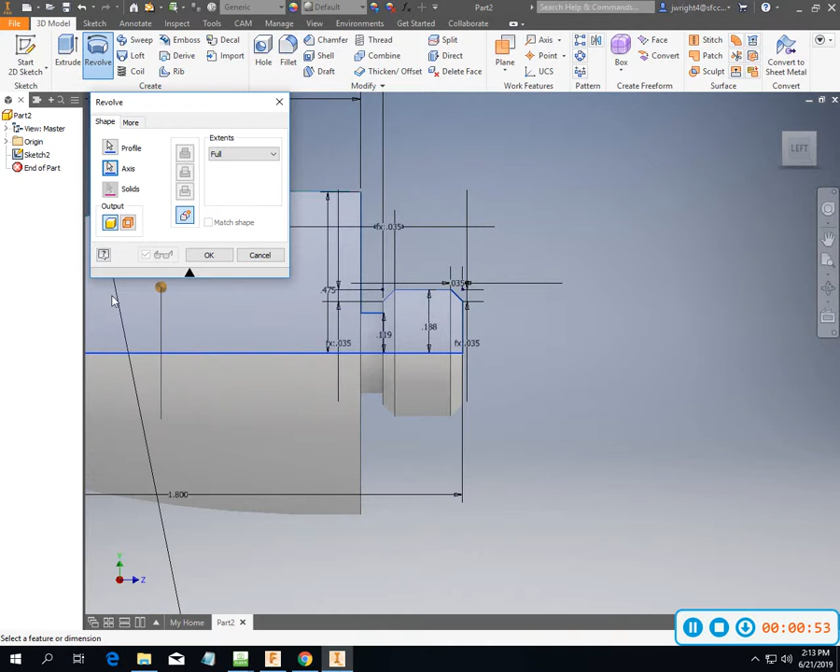So I've got my drawing or my sketch finished up, so I'm just going to save it, and then I'm going to do a revolve from the axis right here, and that looks pretty good. That looks like a nose cone to me. Looks like it's covering the right dimensions, got all the things that I need, and hit OK.

So essentially, I had to go back. I had to get back in there and edit that thing because I did not put a radius down here on the end. So I need to go back here and fill it in. 25 thousandths, I believe. Here and here. Yep. Close that. Go back. Finish that sketch. There we go. Now I got my radius on there.

Oh shoot, I missed a chamfer up here too. My gosh, I'm as bad as a student. Go back in and edit that thing. I'm trying to knock out several videos today, so it's kind of going back and forth on some stuff. So I'm going between quality and this class.

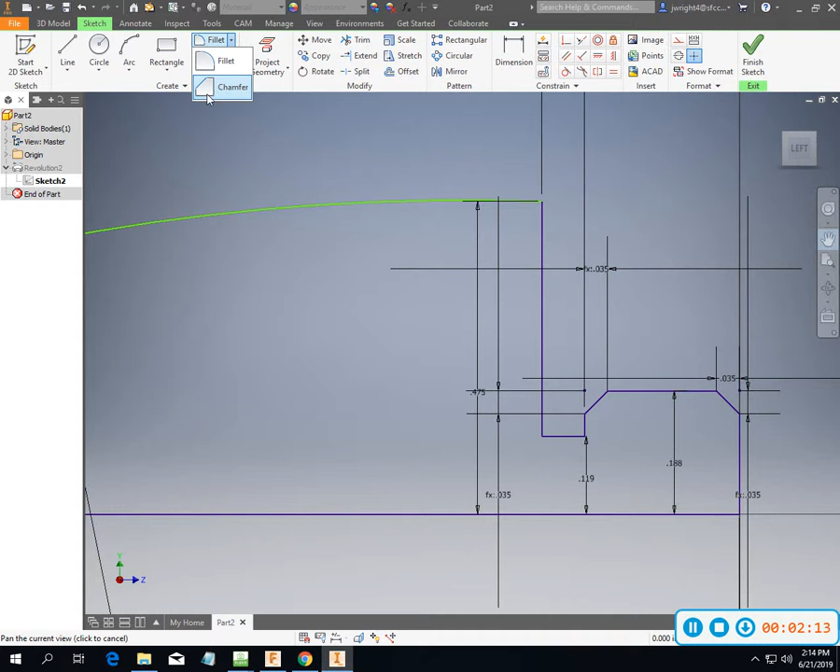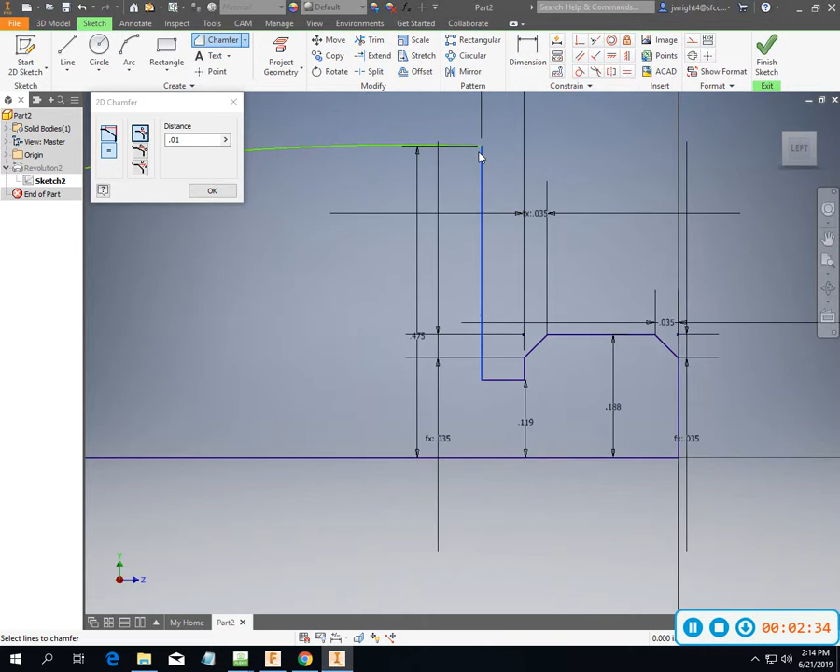So let's put a chamfer in, and it is a 10 thousandths. Oh, barely worth even putting in there. You connect to that. Looks like I got something going on here. Let me pan around. I don't know that it matters terribly on this part, but here's my 475. That should be the 950 for the OD, but if you look, I'm going to draw a line right across here.

I actually go up above there in this section here. I'm going to trim that out. Bring that back in. And like I said, I don't think that makes much difference on the part that we're working on. Really, these are kind of just play toys anyways. Put 10 thousandths chamfer in that. I think I have everything that I need now. If not, we'll just say we do. Finish that sketch, bring it back to Revolution, and there it is.

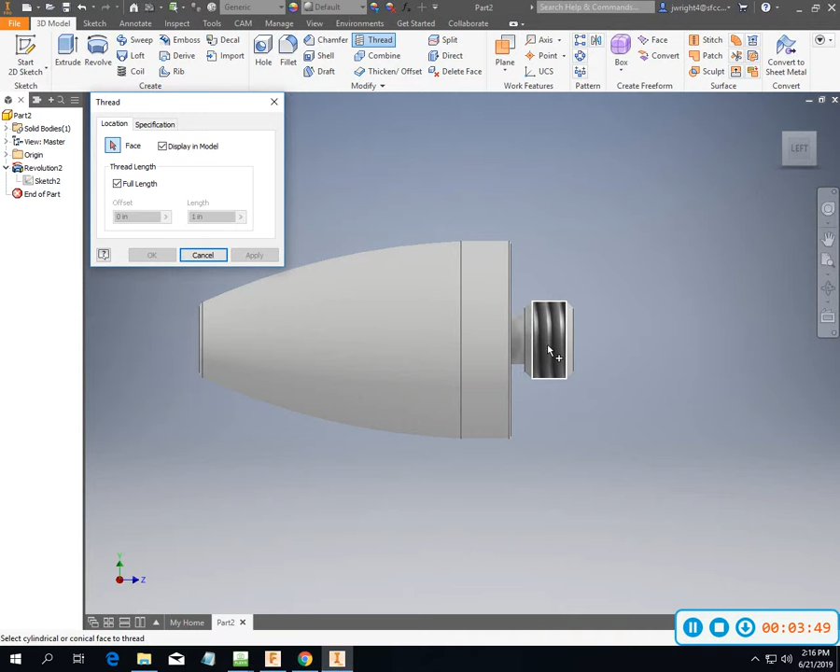Now, I went ahead and put chamfers on the fronts and the backs of my threaded parts. We'll go ahead and thread that. Change that 3/8-16. And it is a 3/8-16. It's on sheet 2 of 2, 3/8-16. There's not very many threads on that part. It is right-handed and it's external, so it's A, and the class of it is 2. Call it good there.

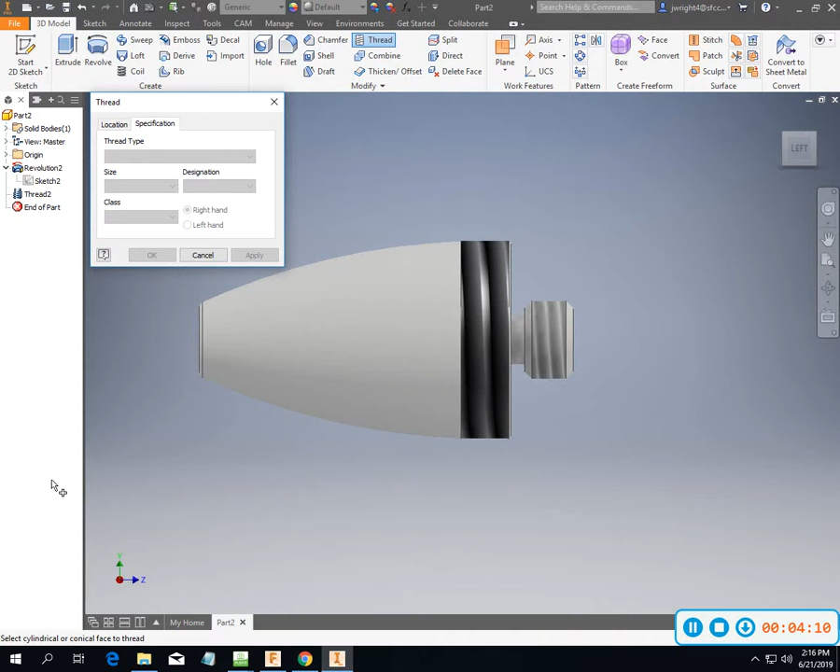So if you are doing threads on Inventor, I've always used an add-in called Cool Orange. You can download it and it'll populate up here in your tabs. On this version, we just updated to 2019, and when they did that, they did not bring in all of my add-ins with it. So right now I don't have it. So that doesn't mean that it's not putting the threads on there. It just means that it does not create real threads as you're viewing them. So what you're really getting is just kind of an overlay of a picture of threads, which is okay.

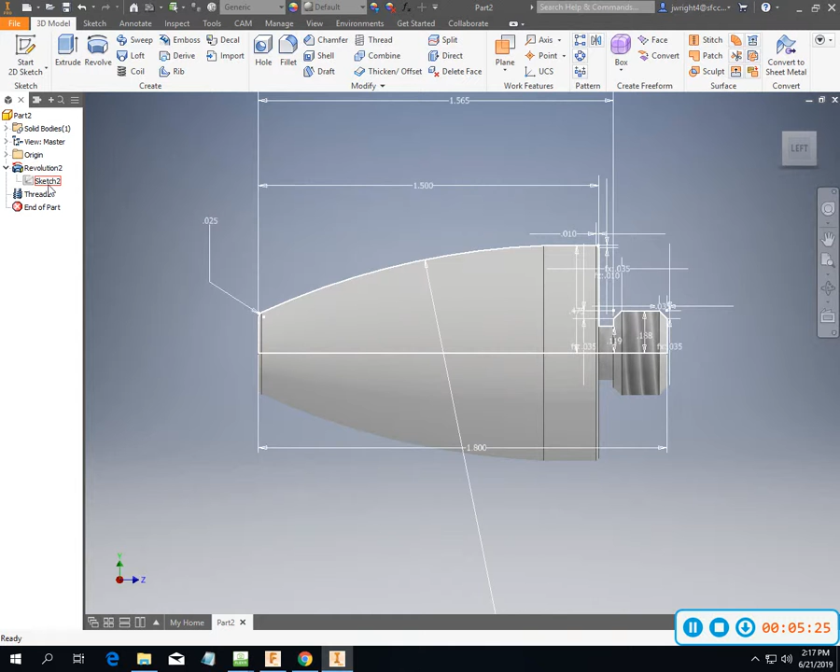I mean, it's not killing us. There's nothing wrong with it. It's still going to thread and do what we want. And even if it didn't, we can go in and make some modifications to what it is that we wanted to do. So here we have our part, and pretty happy with most of the things on it. And it actually looks like, as I'm looking at my sheet 1, there is a dimension of 1.375. I'm going to go back and take a look at that and just see where we ended up on that when we made our modification to our radius there.

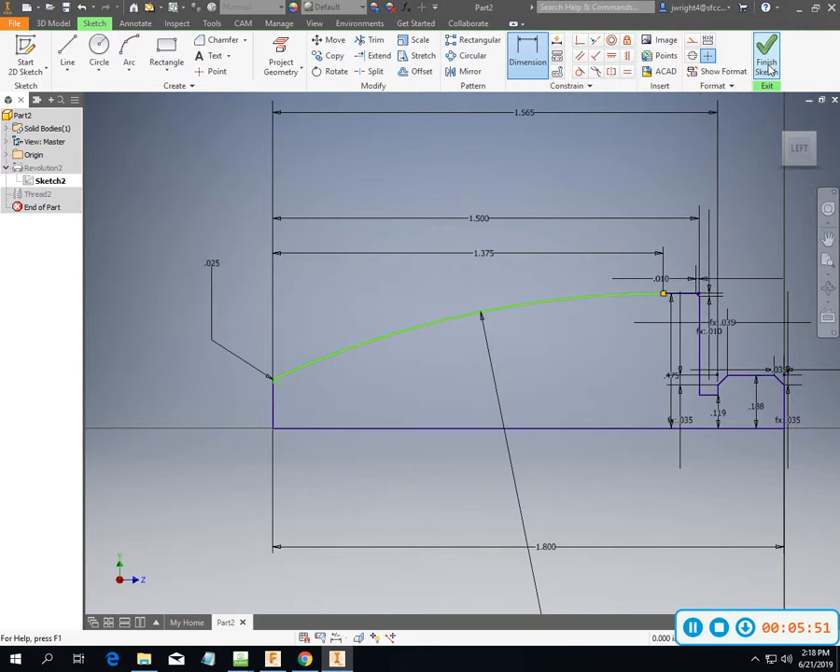So from this point to the end point, a little bit off. Alright, so let's do this. Let's go ahead and make it 1.375. Push that back. And then finish the sketch. Alright, that looks a lot better. Looks more like the print. That's the great thing about HSM and Fusion as well, is that all of these things are global. Everything's moving along with it, so even if I changed my part after I made my program, all these things are going to follow along with it.

So I've got my drawing, and now I can go in and start applying some machining. So I go to the CAM tab, and I'm going to start doing some turning.

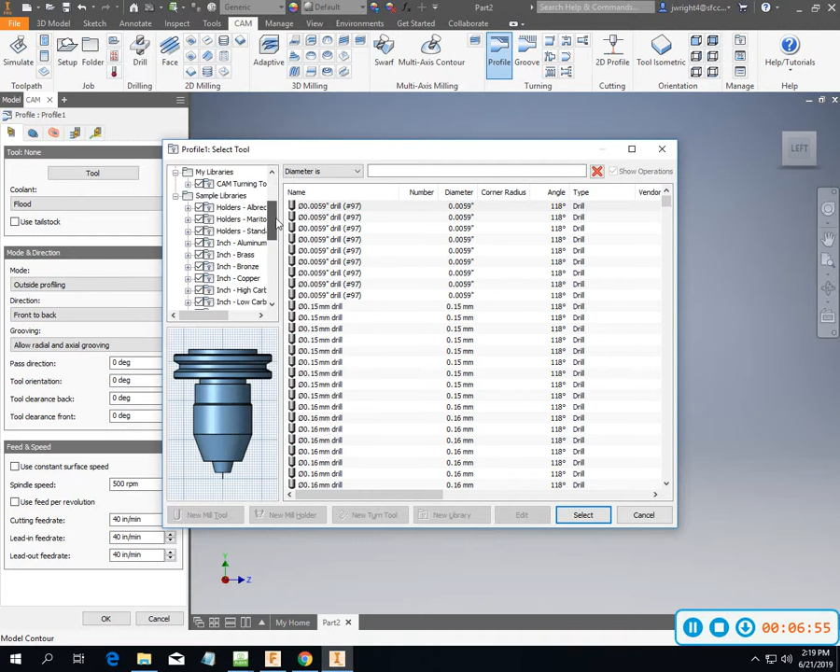So I can come in here and go profile, get a little more room there, and pick the tool that I want. I tried to import that HSM package, and it did not quite come in the way I wanted it to. So what I'm going to do is, I've got kind of a generic set of tools here, so I'm going to just create and modify as I go.

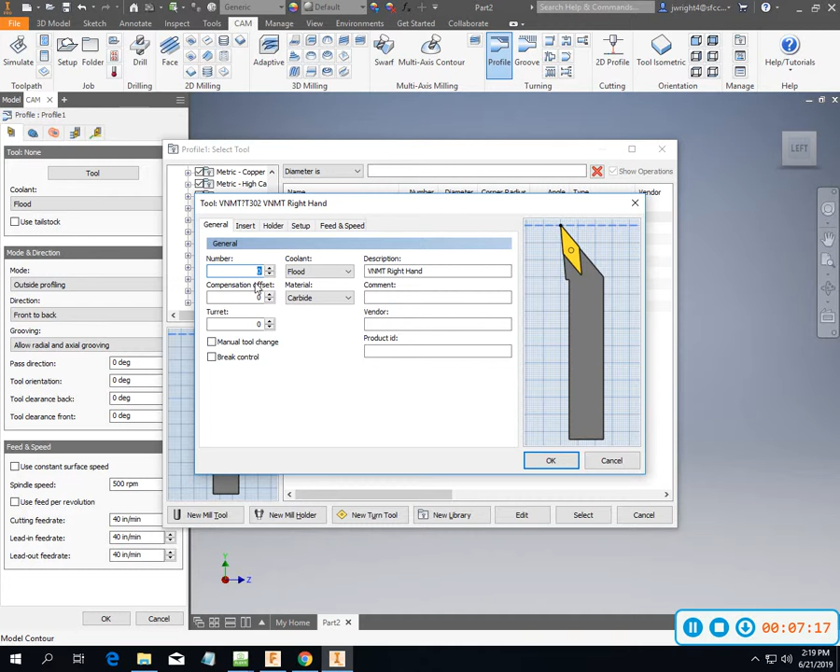So I got a VNMT, which is similar in size and shape, so I can edit it. Carbide, we can call it tool number 1 if we want to today. And non-reversible, ours is actually reversible on our insert. That's a 35 degree. Let's see if it has a 55 degree option in there. There's one. Let's just try to make it as close to being what we really have.

Okay. I'm pretty sure the ones that we have are the same ones that are Kennametal, and they are not reversible. So two-sided, not reversible. And let's see, corner radius is a lot sharper than that, I'd say. I don't have the inserts in front of me, but I would say probably something a little closer to that. Yeah, everything else seems like it'd be okay for right now.

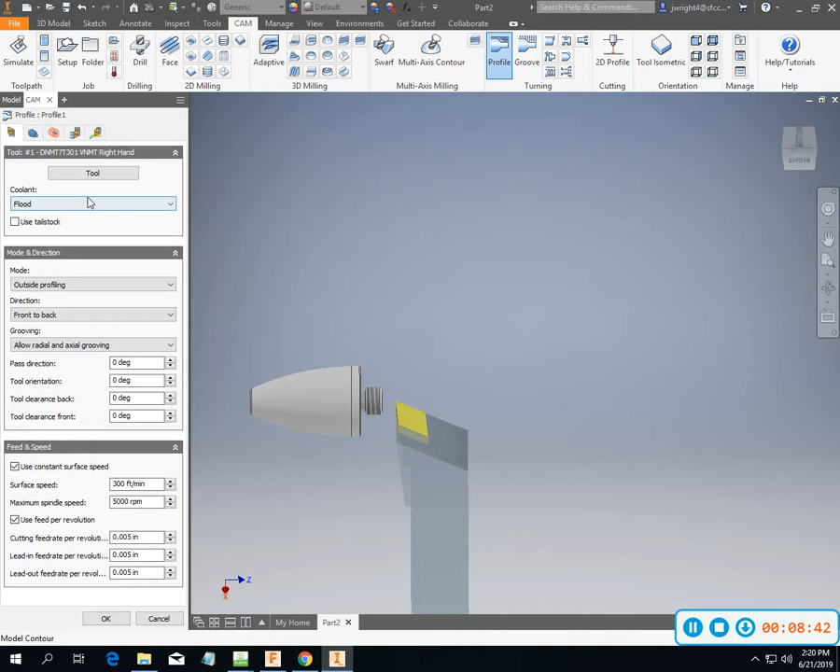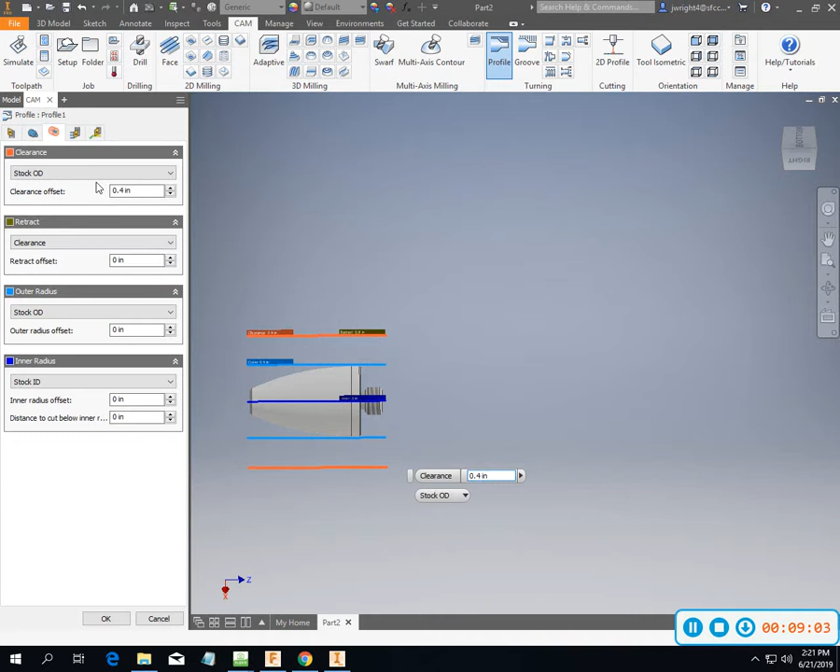Something doesn't look right. Okay. This thing flipped over and around. And we need to look at what our stock size is. So this part, I think it comes from a 2-inch stock. So got our model. Oh, you know what I did? I need to get rid of this first. Come back out of there, go back into my setup. Yeah, I started an operation, but I never actually did my setup one for it. I knew something wasn't right, but I just couldn't tell exactly what was going on there.

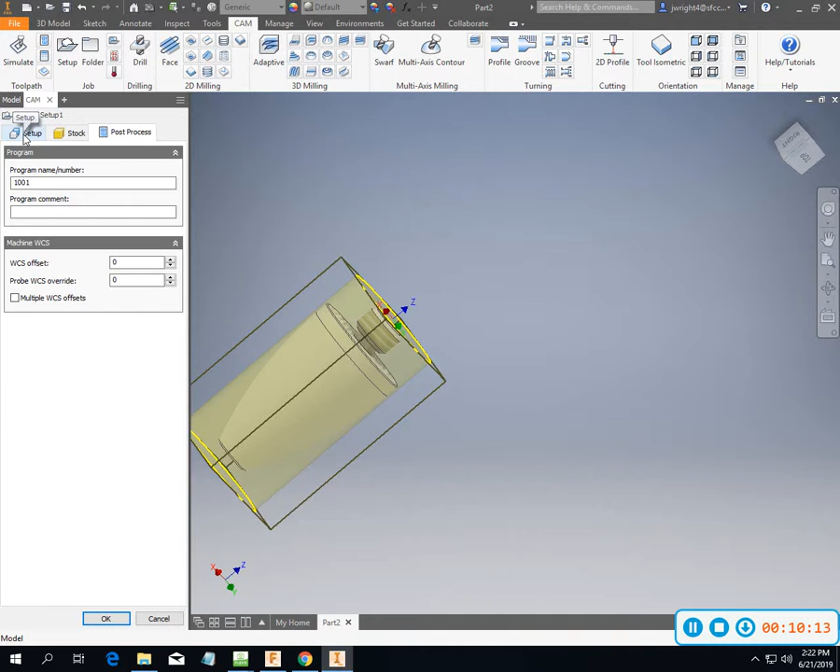So here's my part. Get this thing looking just a little bit more like it ought to. And we're doing a mill turn, so you got milling, turning, mill turn, and alright. Let's go to stock. Our diameter is 1 inch, that can be 2 inches. Go from the front, and let's give it an offset of about 50 thousandths. Post-process, we're not concerned about what offsets we're working with right now. Okay, everything else popped in okay.

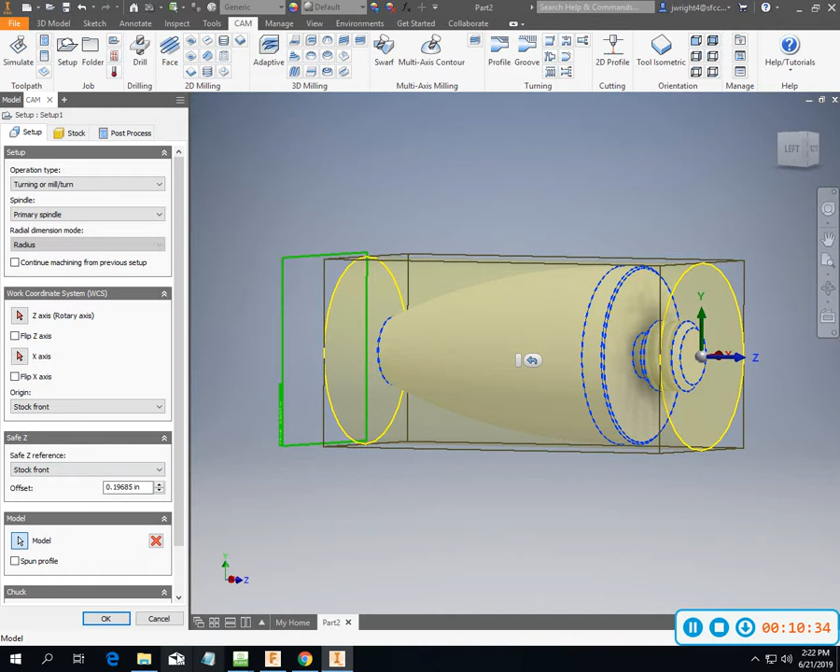I often start my drawings wrong and don't actually get what I want where I want it. And this one didn't turn out too terribly bad. So there's my stock, my round stock, my 1-inch aluminum stock, and let's see, no Z-axis, rotary axis selected. Okay, so let's go to Z-axis. So my Z-axis, no, I want to flip that. Yeah. Okay. So this profile I never did anything with, but I need to do something with it. So it's still there.

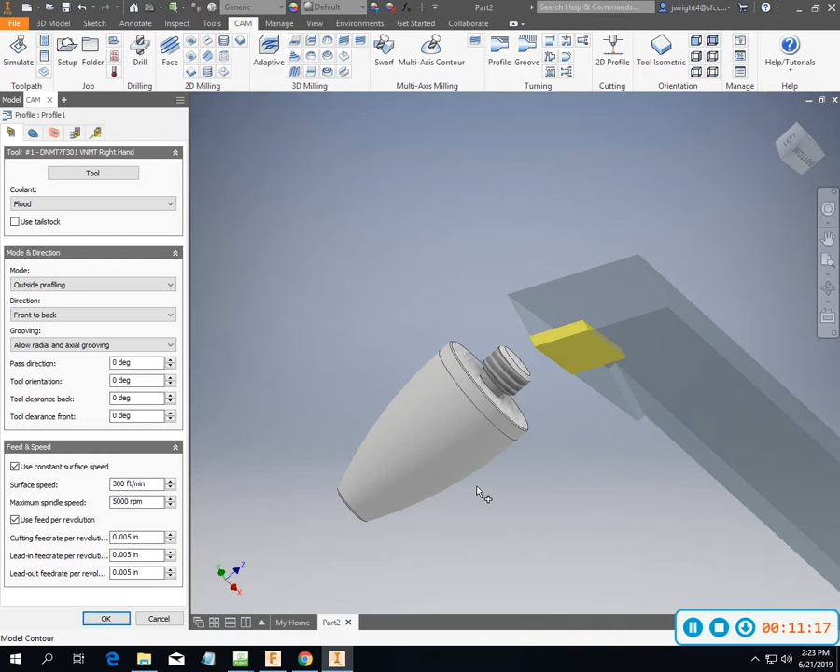And turning on CAM has been something that we've been doing for a long time. I've kind of got this thing flipped around, but it'll be okay. There we go. I feel a little more comfortable about that. Okay. And so I've got some stuff that we talked about last time, how I want to control my tool in computer and control wear, inverse wear. Fusion is not going to give you those options in there. So what do I want to do? Kind of do some lead in action if I want to have a lead in, lead out on there. But at least for now, we can kind of start with stock.

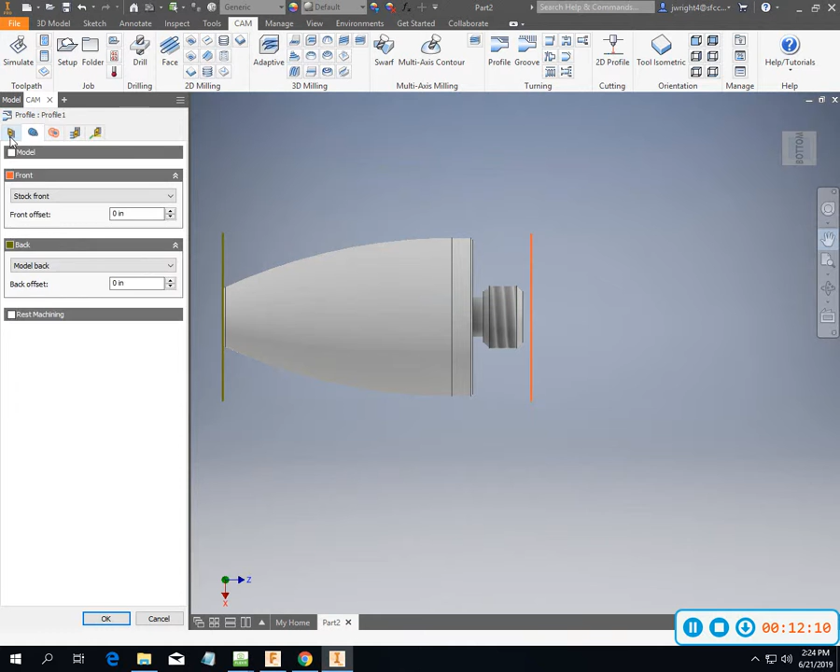All right. So a long time ago, this really would have bothered me about the way that it faces it off or does not face it off. I can go in there and actually force some facing off. So up here I've got turning face, I've got profile and grooving, turning, I've got a couple of turning and parting options, I've got secondary spindle stuff. I can do this as a face-off pass, or I can just go straight into the actual lineal turning for it. So if I simulate that,

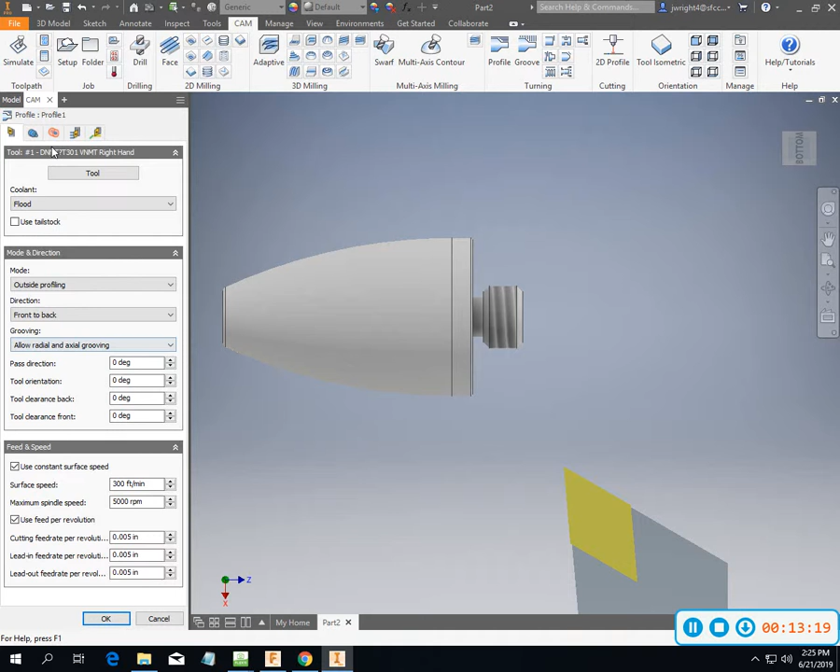so my red is a little bit of collision detection that's coming up. I think for what I've got, it's not going to give me much problem. I do want to come back in and do this though. I do not want to take a finish pass across there. I'm going to go ahead and simulate again after that. Now, by doing that, since my 55 degree didn't have enough clearance to get into some areas like down into this section here to do the chamfer, you could tell it knew at least that it was not going to be able to do that.

So what I'll do now is I can just do another operation, I can do another turning operation, another profile operation, I could come in and face it, I can do really essentially whatever I want to do there. And so I can do a profile, or if I want to, I can duplicate what I've got. It kind of just depends on what you want to do. So I'm gonna call this my rough passes, and I'm gonna call this one my finish passes.

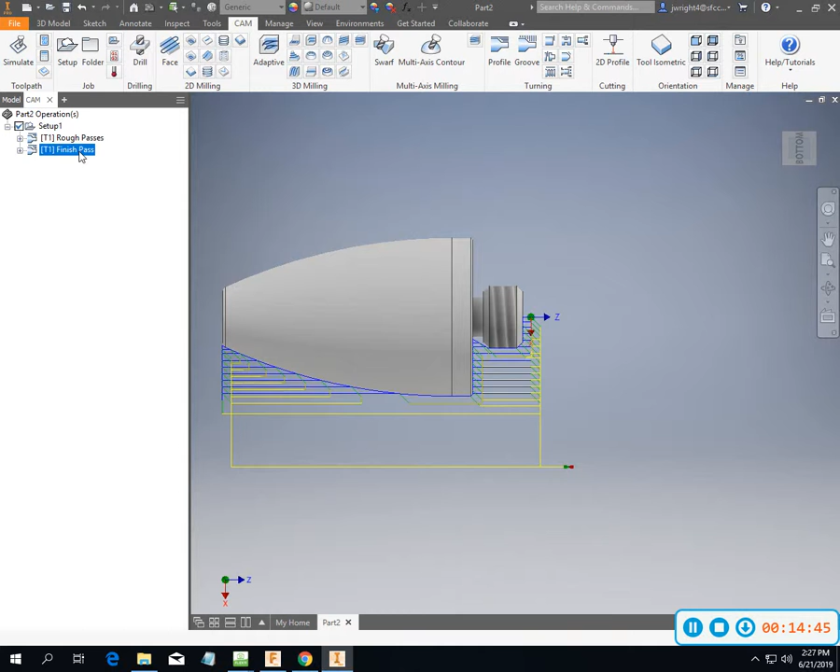Finish pass. Now, I'm not going to use the same tool. I'm just using this as an opportunity to see what you can do with duplicating. So let's call up a new tool, or let's take this tool and duplicate it and open it up, and we're going to call it tool 2 using offset 2.

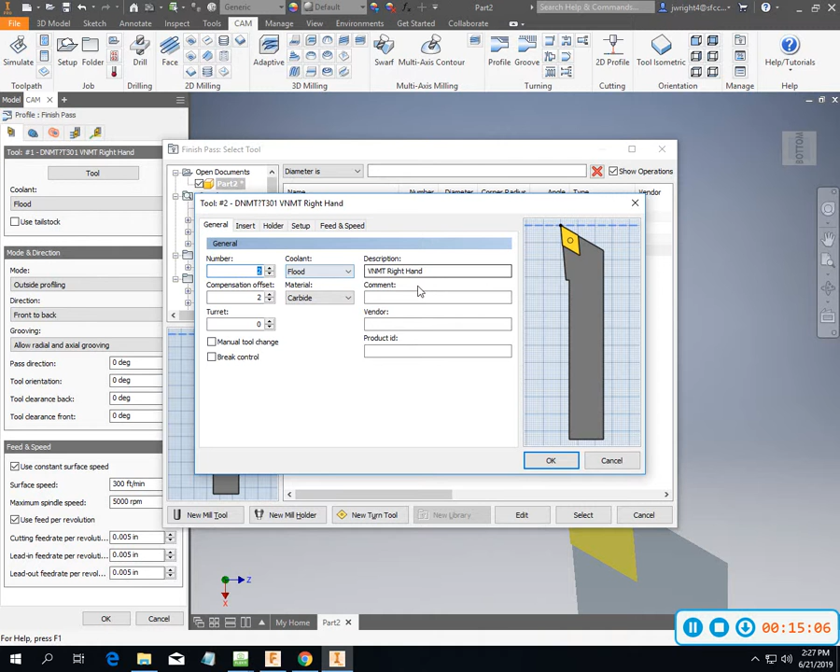It's carbide. We can still call it a VNMT. Doesn't make any difference to me, but we are going to change the angle on it, 35 degrees. So now that's tool 2. Okay. So now we haven't told it any different, so it thinks it's trying to rough it. So now we need to go into our options. We do not want to rough it.

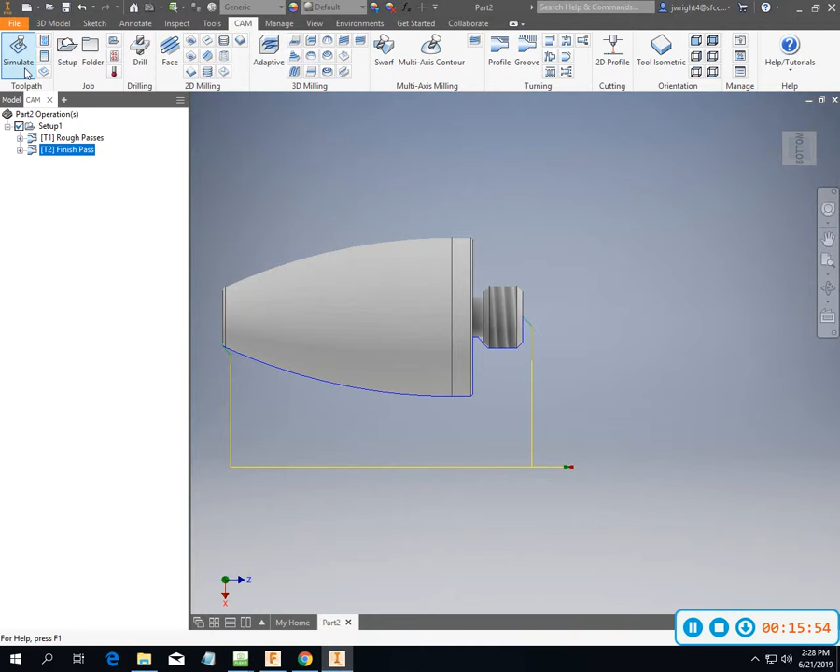Single pass to finish it. Barely has enough clearance, it looks like, to get inside of there. Now it shows collision in the red, but I think that we're going to be okay on that. We could come in there and tweak just a little bit of what's going on with that to get some of those things out of it. I think from what we've got here, just knowing what I know about this tool, we're going to be okay there.

So that stuff's done. Tool 1 is almost always our rougher. Tool 2 is almost always our finisher. This is probably one of our easier ones to do, because as we get into some of the other ones, we're going to get into some pretty wonky little things. So I'm going to have to flip back and forth as we're working on this one, just to try to remember what all we have for our grooving options,

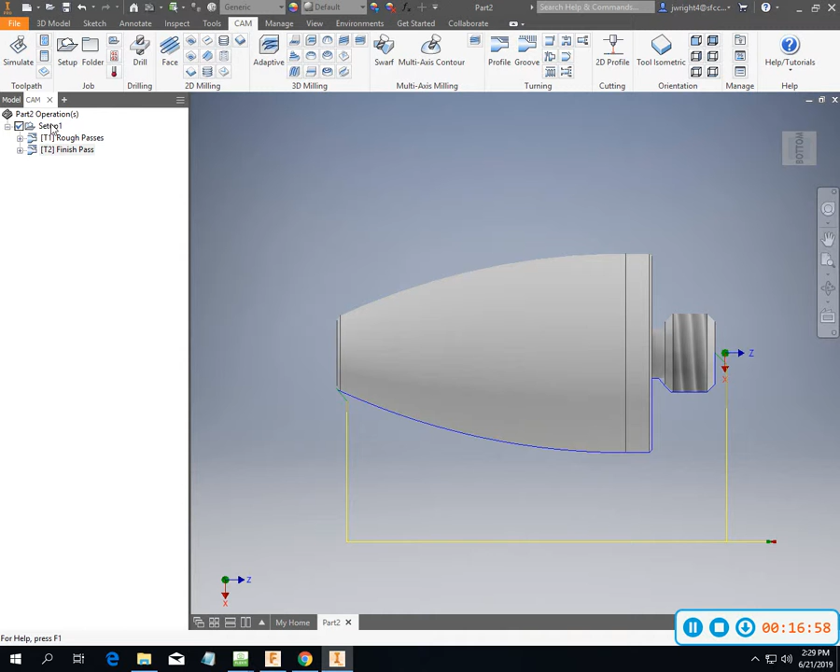and then we have a normal parting tool here. So it looks like this groove right here is 65 thousandths, and so I can go back to my model and edit that sketch. Just jump in there and see. Take a quick dimension on it from here to here. 65 thousandths. Yep. Finish that sketch. Go back to my CAM. Regenerate those if I want to.

Now I have a couple of tools that I have gotten from Kennametal, and one of them is a really narrow tool, and I'm going to pop up my Fusion that I have here, and I think I already have some stuff set up, if I can find it. Go to manufacture, and in my tool library, in my local, this CAM lathe tool is already set up and ready to go to download in your first turning module in EDT 134.

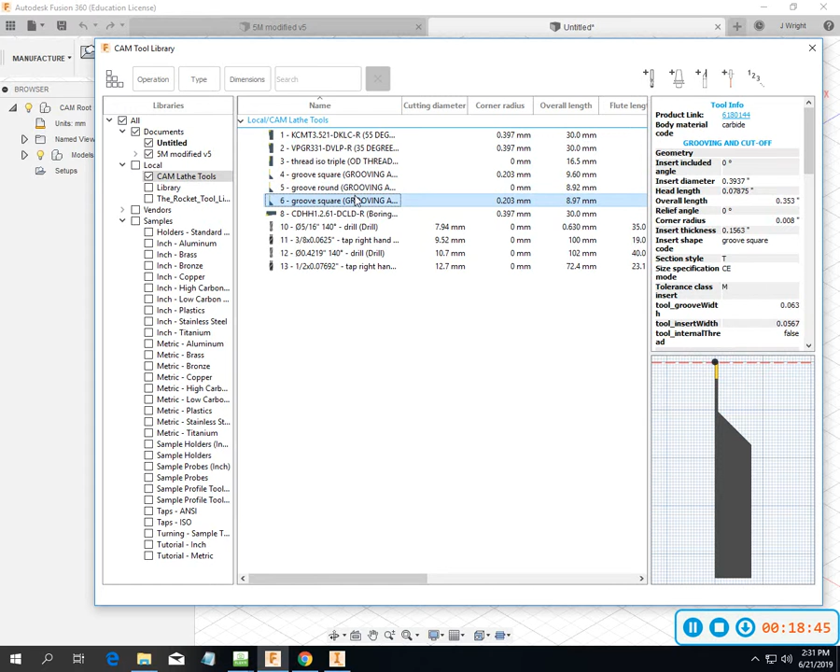So let's see, here is a groove square, and that insert width is 118. That one will not do it. This is 79 thousandths, and this one is 63 thousandths. Alright, is that going to be what I want it to be? Some of these dimensions they gave us off of the CAM package, and I downloaded this from Titan, and then just did some modifying, because we're not using the carbide drill. So we'll just be using high-speed steel 5/16 and 421 drill there.

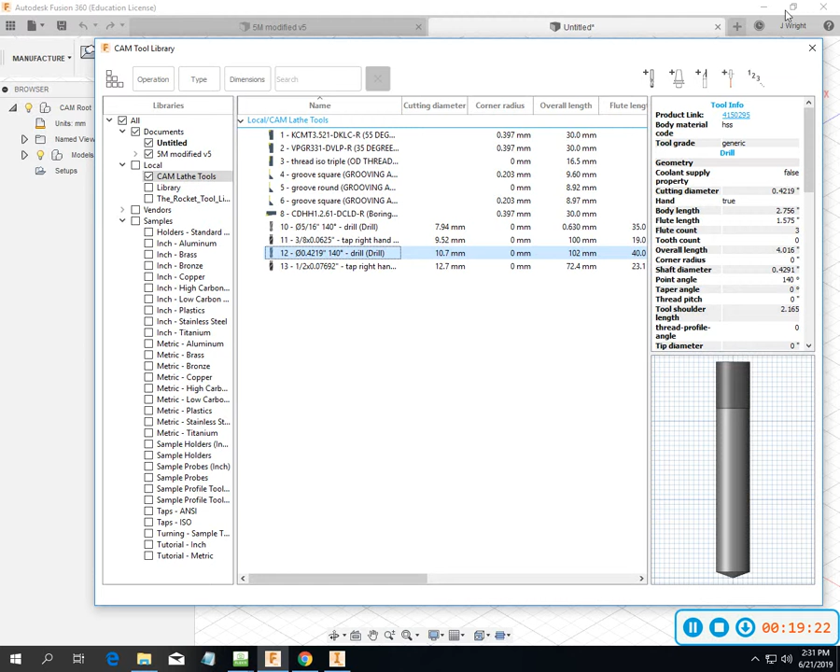So I believe that our tool that we're using is going to be right at about 63 thousandths wide, and I think we got enough tolerance on this part. We can probably come in there with one plunge cut for the 63 thousandths. The downside of that is it does not leave us hardly any room to play with on our threading. So we'll shut that thing down, come in here, and we can do a single groove, and let's see what we've got.

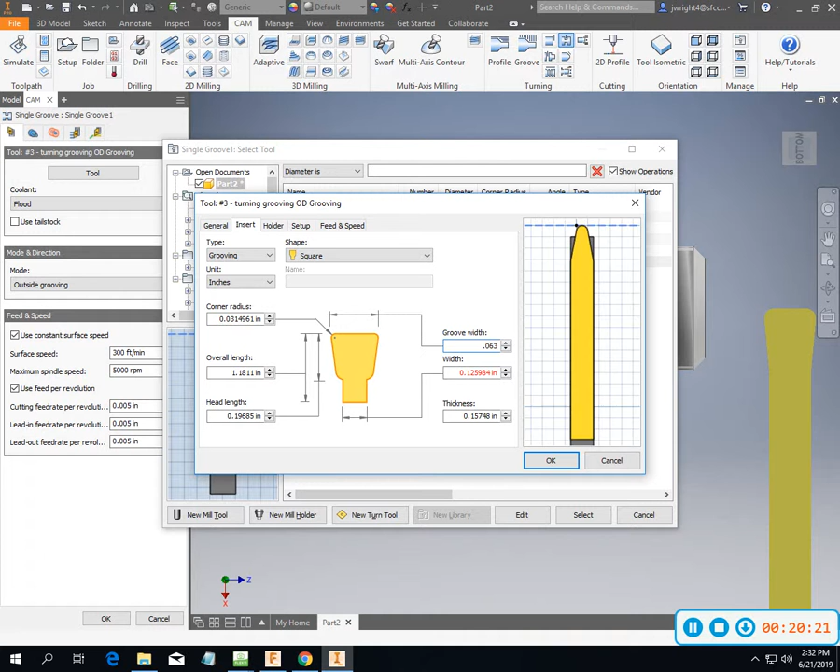Turning samples, turning OD groove. I don't have anything that's even remotely close. So I will select this guy, and I'm going to go back into it and modify it. Square groove, it's going to be tool 3, and our insert in inches is going to be 63 thousandths. Let's just say 63 thousandths all the way through. And it is square. I think we got a little bit of corner radius, but not much. Let's just say we got 5 thousandths in there.

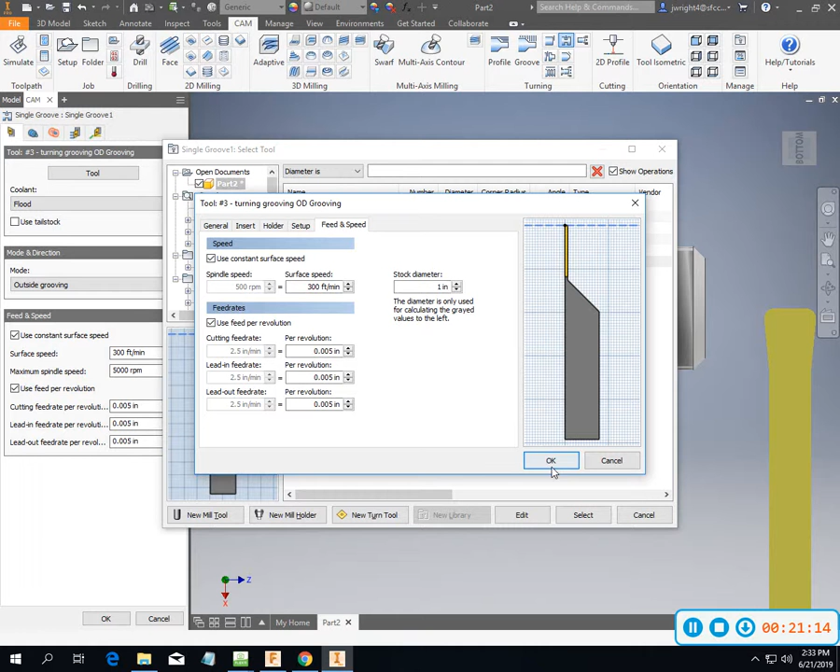So on this one, constant surface speed is used. That'll be G96. It's going to allow your spindle to speed up as it goes down to a smaller diameter. It's going to slow down as it goes to a bigger diameter. If I wanted to keep a consistent RPM, I can come in here and make it a constant RPM. So we can try that on this one and see what it looks like. Normally, I would use that surface footage. We can try both ways and see. So I'll let you guys play around with that one. Okay, and we'll select it. And so our groove.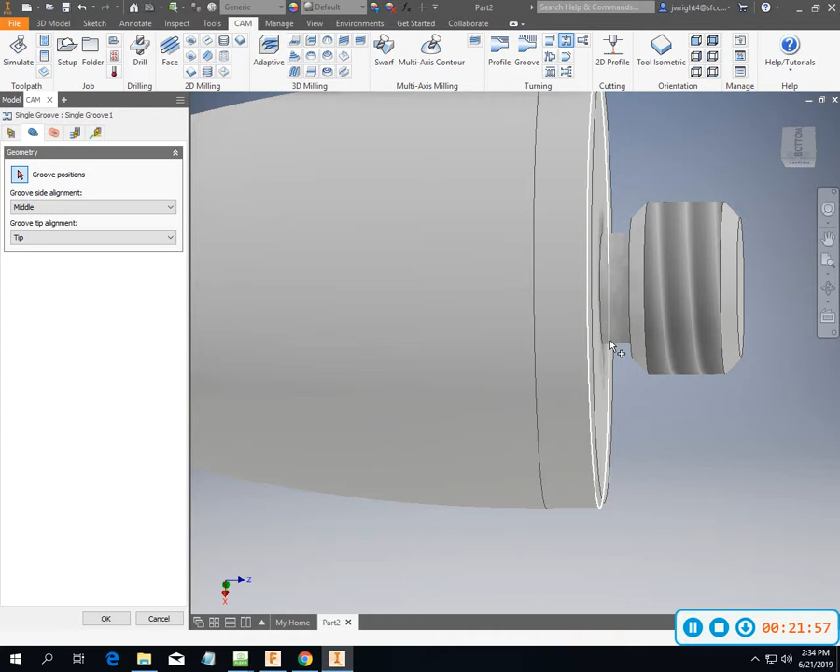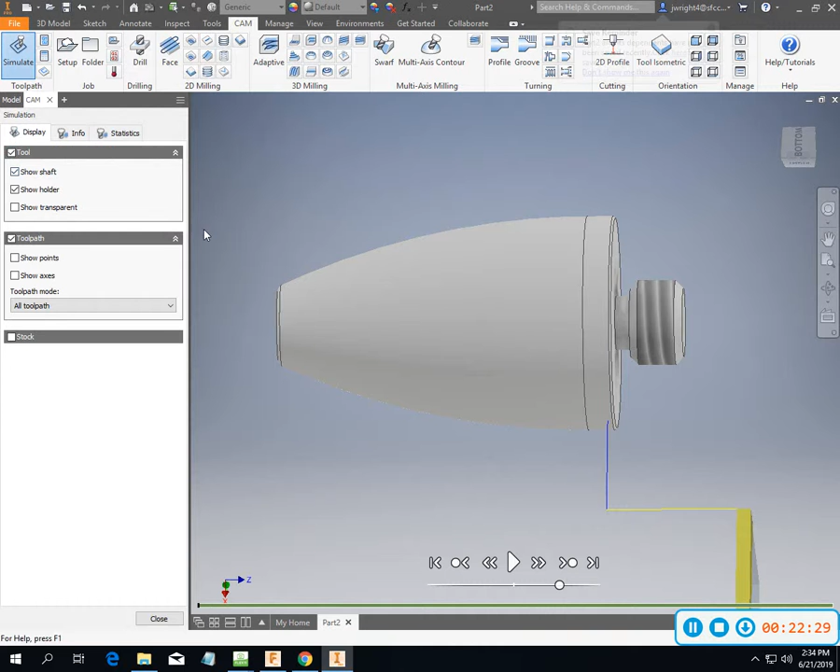Let's see. Come down, let's see what that does. No, see, that cuts into it. So we need to come back into it. Front. Still going into it. What do we got going on here?

There we go. All right, single groove application there.

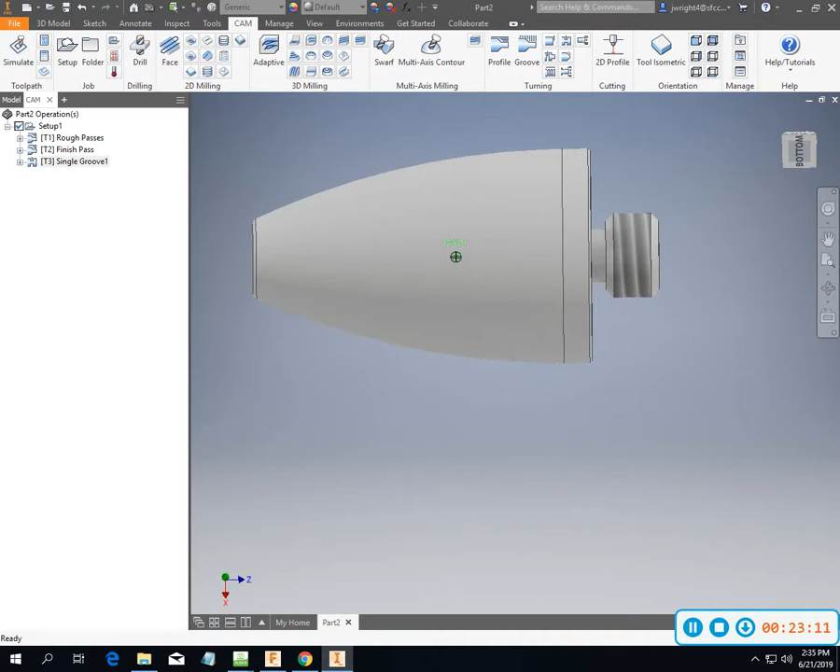I think what we're working on, especially this being our first one, we'll spend more time talking about constant surface footage and cutter speed as we go. This would be a good one, just to get a feel for it, that way this thing's not spinning so fast as everything's happening. We are going to get a lot better surface finish if we go ahead and use the G96 on this.

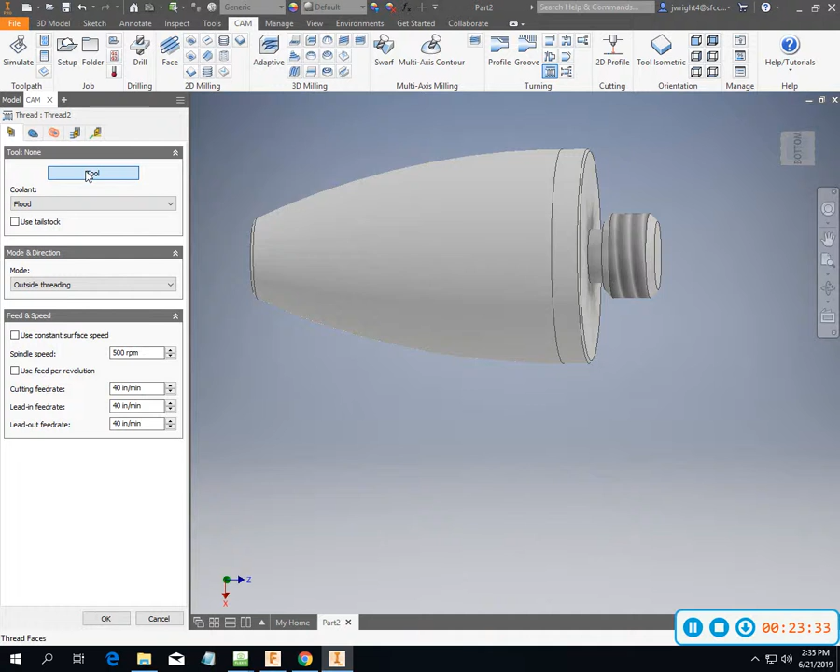All right, so now we need to do some threading. I already have a decent little threading tool set up there.

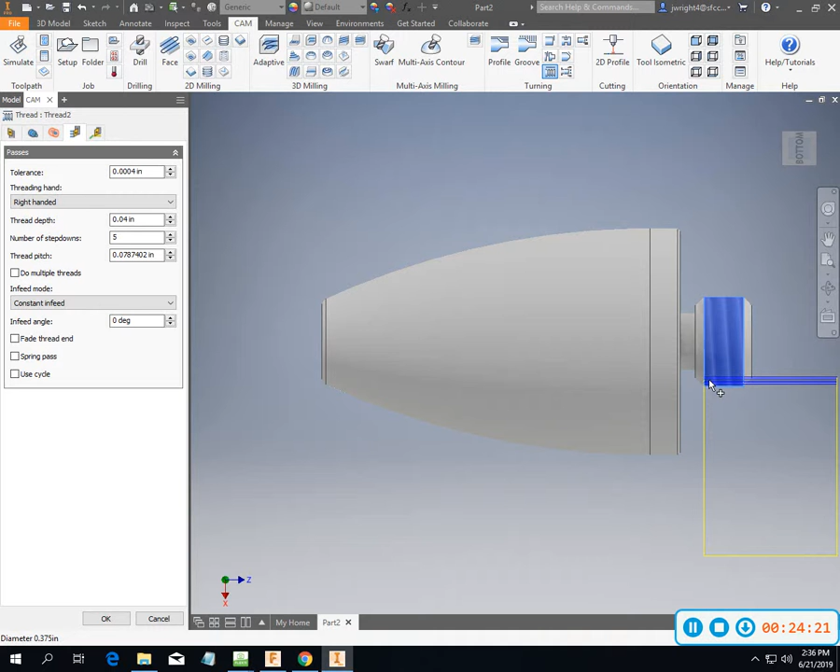What I don't like about this is it's only going to this edge, so we're going to need to be able to move on just a little bit past that particular thread. That's what I don't love about having the chamfer on that back side.

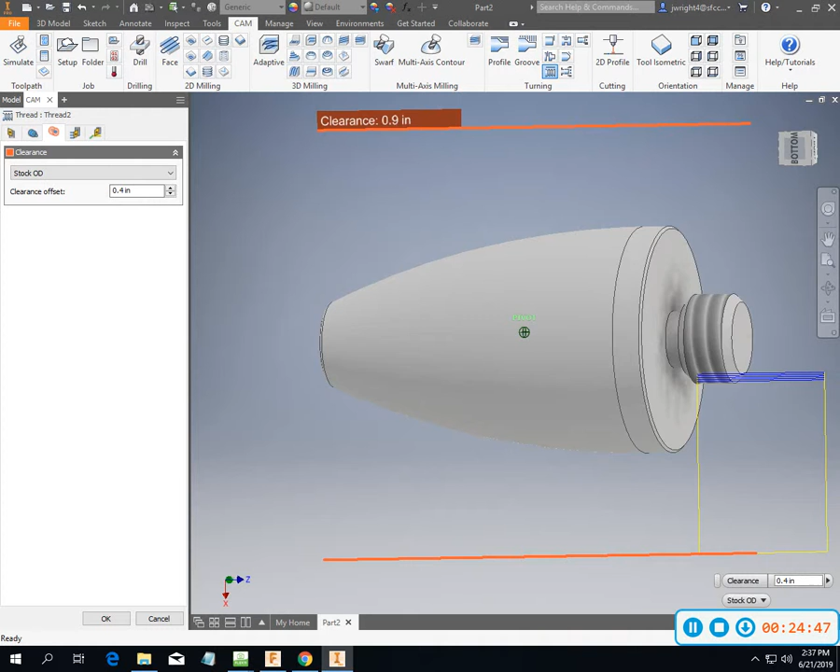We'll leave full retraction on. Let's take a look and see what we think here first.

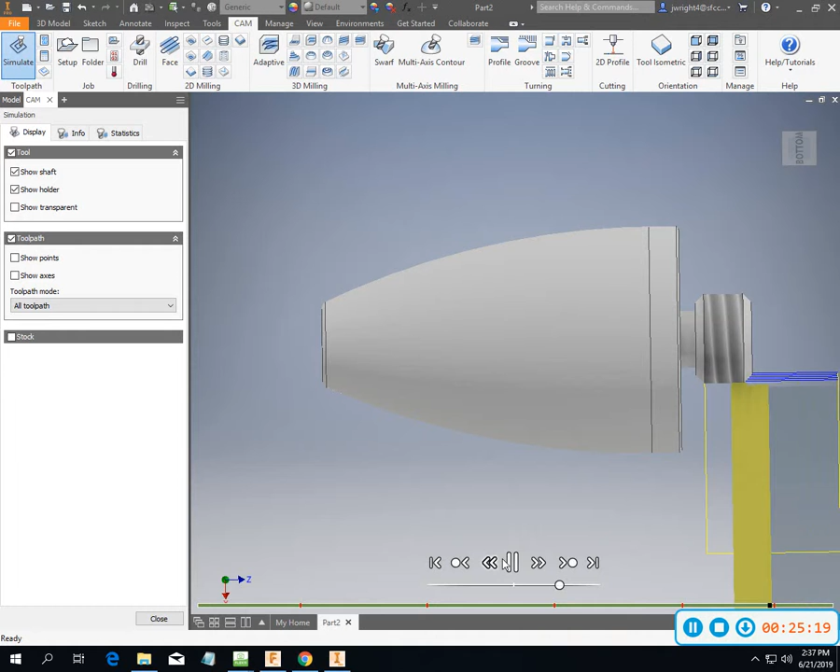What I'd like to do in this one, the goal is to not do any modifications to it once it goes into our post, or once we output the program. We're hoping to get a finished program all the way through. So what we have to be really careful with, let's go 50 thousandths in front of that too.

It's 50 thousandths from the beginning of the thread, so let's go 150. Start out just a little bit in front of it. Okay.

So I think this is a little bit better looking thread, like this, but still it's really close, and if we watch the simulation, we're going to have to go down further because we're actually not getting, if you watch the thread come across, it's not actually getting through. Close that.

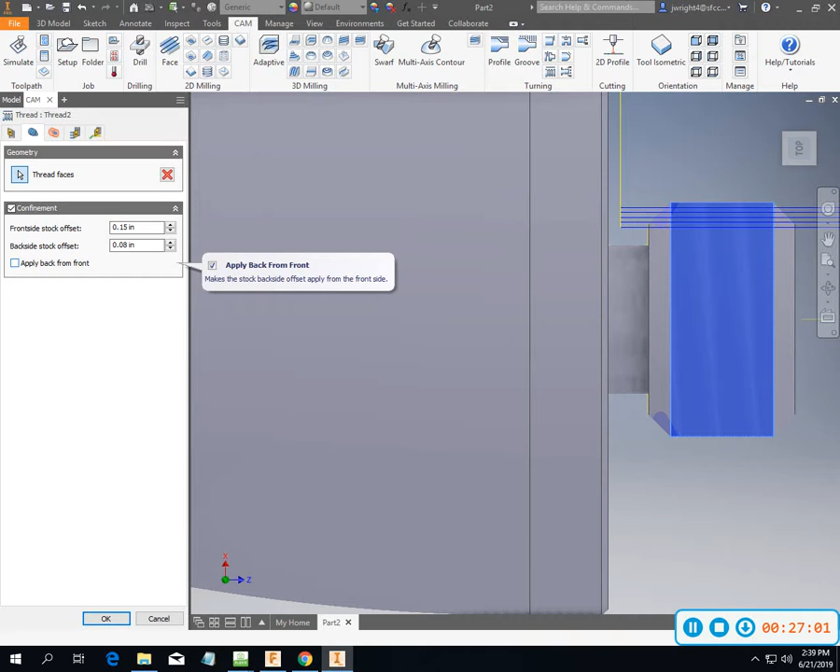What I don't want to do, this front edge is not the center point of the tool, it's the front edge of the tool. And it doesn't necessarily know that on the tool itself, since we didn't use an imported library or geometry, and we kind of just used what we had and just did a quick modification to it.

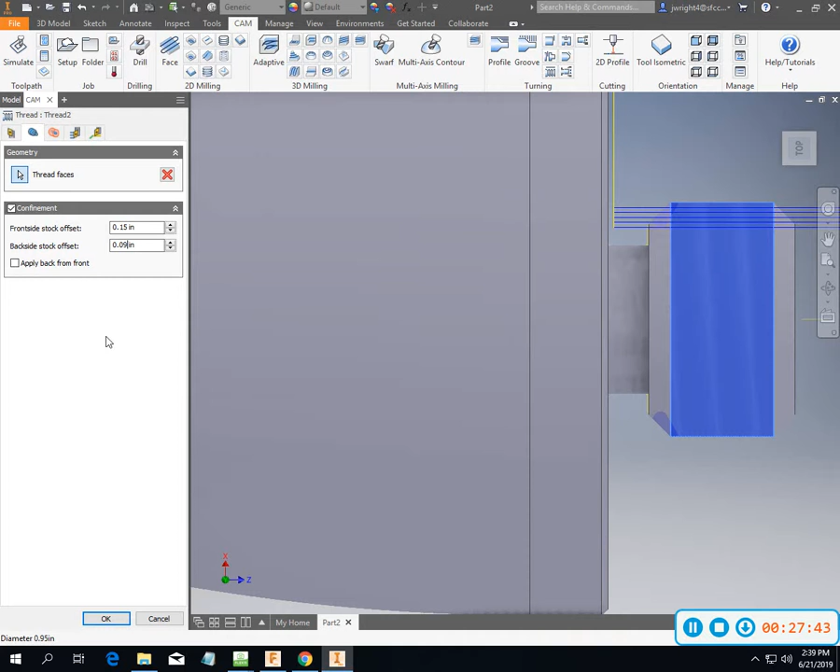So we want to watch, what we essentially have here is 63 thousandths plus whatever size our chamfer was, which is like another 40 or 35 thousandths. And so we've got about 100 thousandths there, so we could go all the way and go even 90 thousandths. That's still going to be 10 thousandths off the front face of that, and that's going to be some help for our thread, but as far as simulation goes, it's going to look even worse.

Yeah, see how you see it? You see it turn to red to there. Okay, so I have, up until this point, turned the entire thing, and let's see.

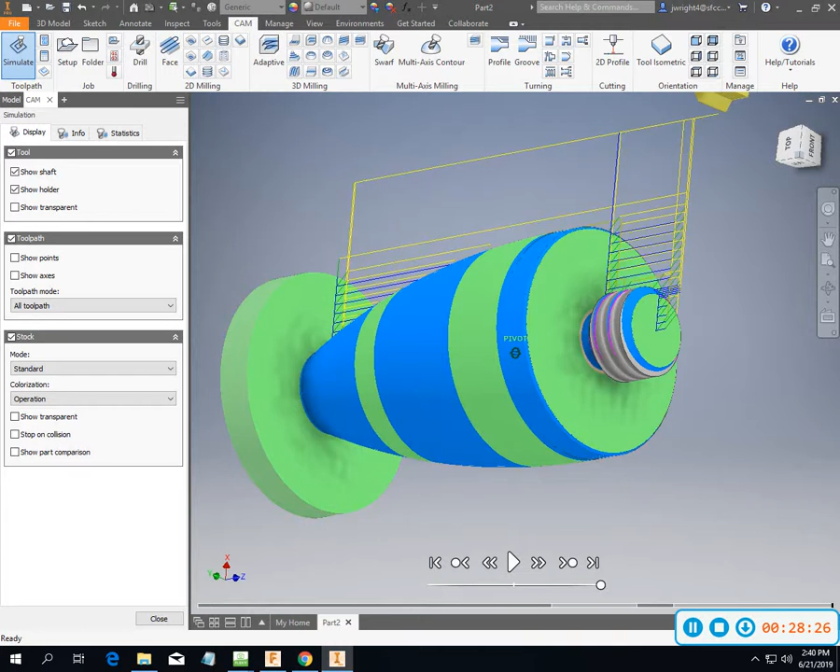Alright, we've got a part. Now it looks like a big dust collector or something, or a vase with weird threads on top. So we've got to get something that is separated from there, and so what we're going to use is a parting operation. That'll be our last tool that we use.

That's a tool that we already have, it's not one that we're importing in. So there's face off there. Let's see, parting is here, and parting could also happen from sitting over on this left-hand command, right-click.

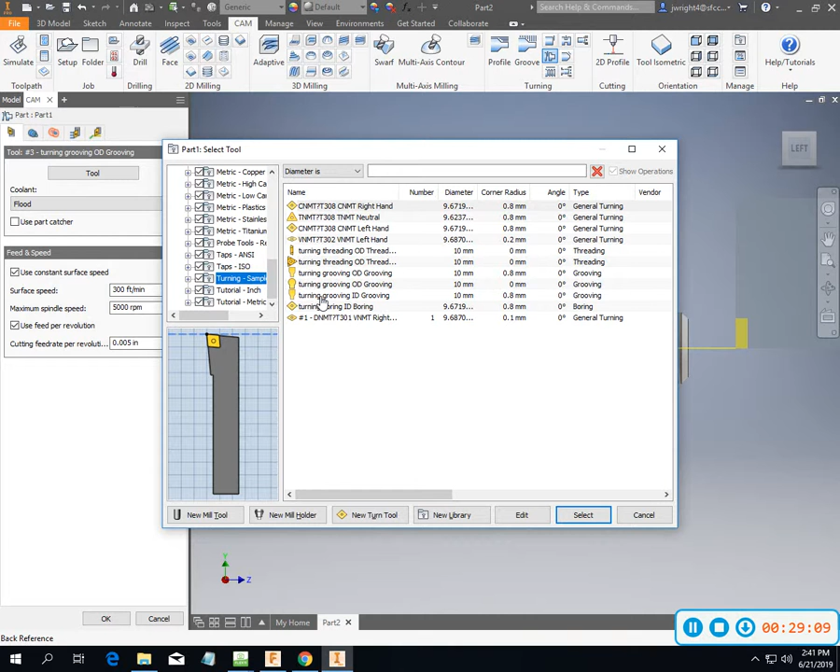And let's find a turning, and we have an OD groove already there. Let's edit it. That's not what I want, that's a round groove. I should have known that because it's a round groove.

Alright, so I've got a tool here, and it is 118 thousandths. And I've got essentially no tool nose radius there, just a pretty straightforward grooving tool.

Okay, so that's my tool, part off. Now I can do a couple things here. I can peck it. If I do that, it's going to have to peck like 50 thousandths, 10 thousandths retract.

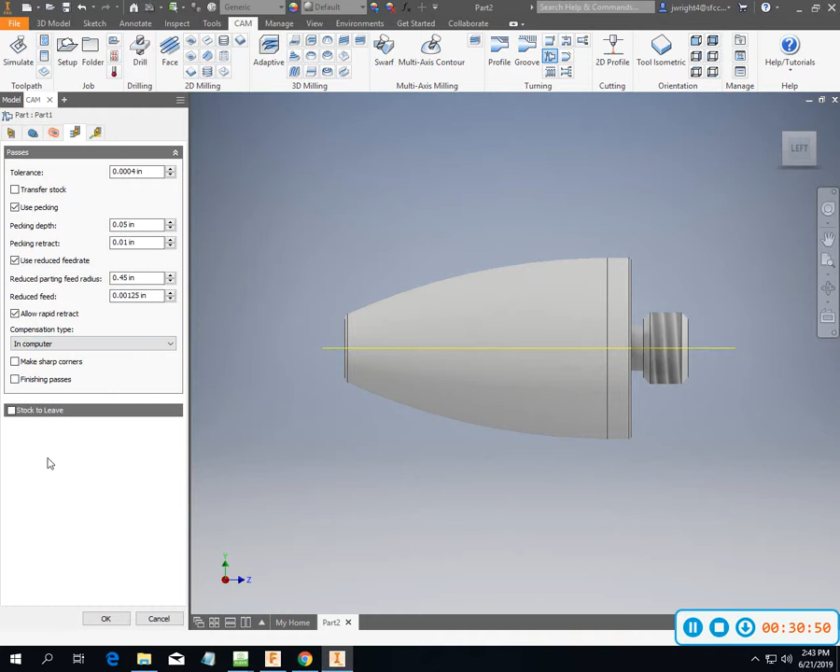I can either reduce feed rate, reduced parting feed radius, and it's got to be at, yeah, about 400 would work, maybe even 450. And reduce that feed rate, allow a rapid retract, no stock to leave, and hit OK.

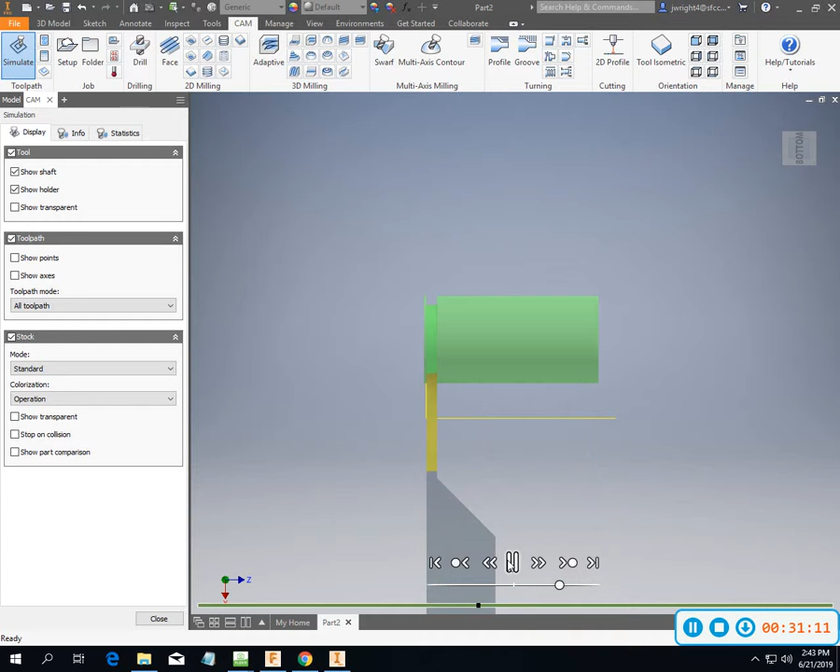Alright, now it looks like it went through the part. Parted it off there. Almost looks like it's taking it all the way down. And that's just the end of our part in there, I think.

So here's kind of where our dilemma starts to come in. I'm going to regenerate these real quick.

I've got 1, 2, 3, 4, 5 tools set up, but I've really only got 4 stations on my setup. So what I'm going to do is make a quick change in this roughing operation here, and rough and finish with the same tool.

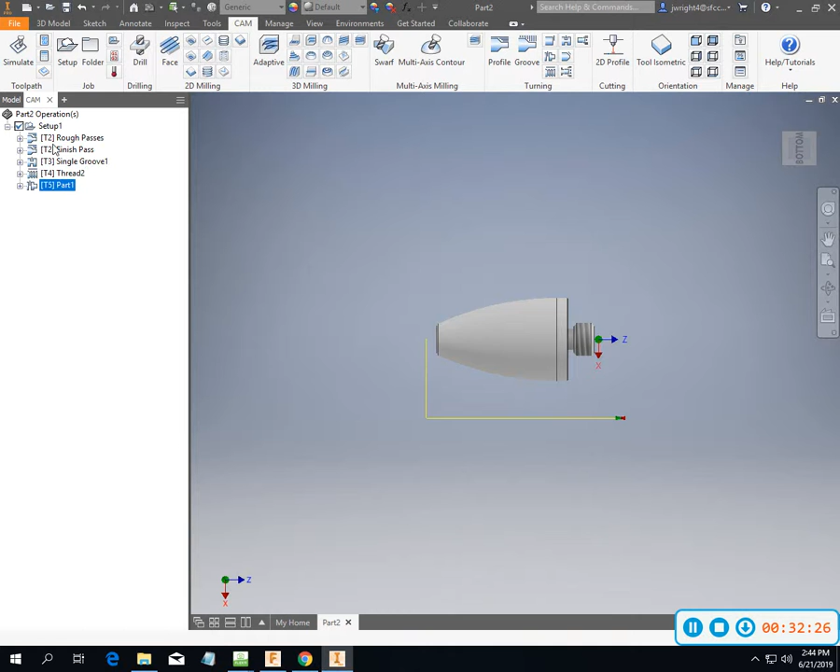I want to use this same tool for this. Select it and hit OK. So now I have 2, 3, 4, and 5, and I can come in. I could just renumber all those tools, or leave them where they are. It doesn't really make a difference, but for some machines, for ours, it will make a difference.

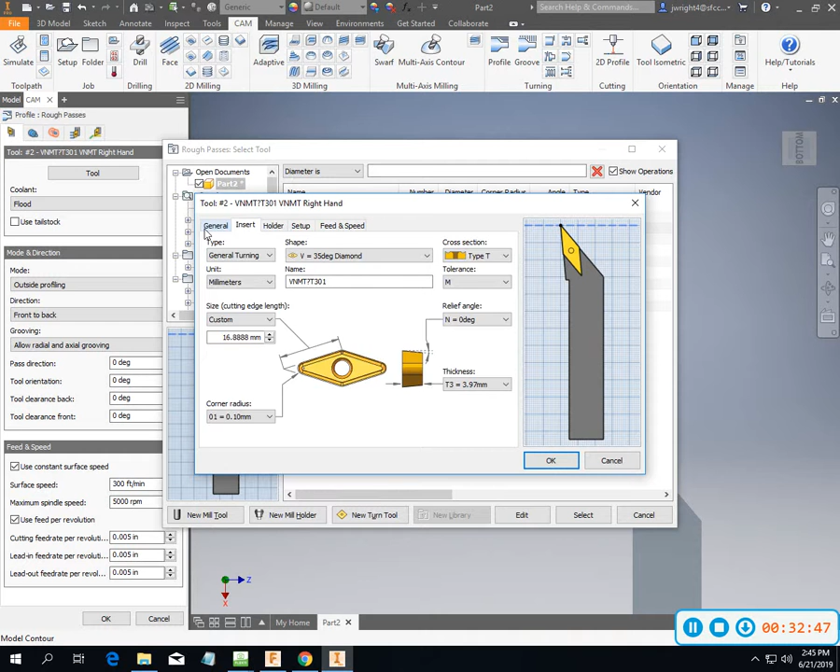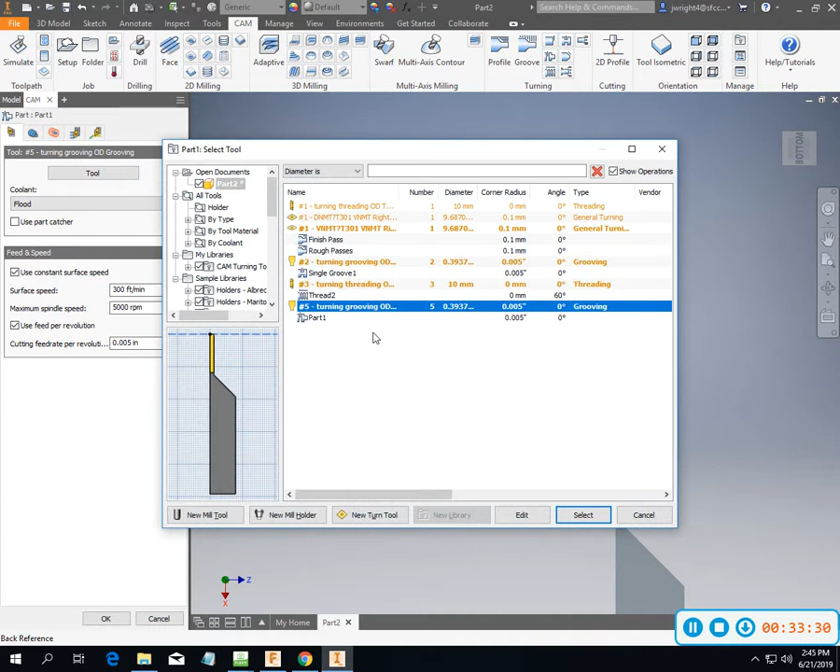So what I want to do is come in and just change some of my tool stuff around, and change that into tool 1. So 1 and 1 now. Change to 2. To 3. And 4. Probably an easier way to do that. Well, that's 6.

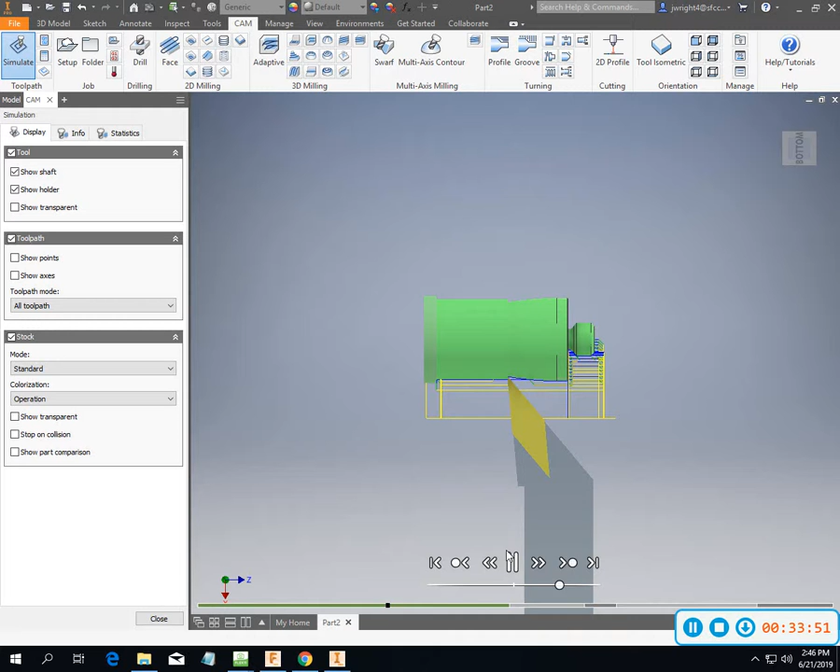Okay, simulate it back again. So now I'm up here. I can go ahead and post my program, or, since I've simulated already, come in and take care of any last things.

One thing I want to do before I keep going is go ahead and rename this and save it, because I have a habit of not saving some of them. Since I've gotten used to using Fusion, it's no big deal because everything follows along with it, and since it's all cloud, I don't have to worry because I can open it up anywhere. That is not the case with this one, so where I save it really starts to matter.

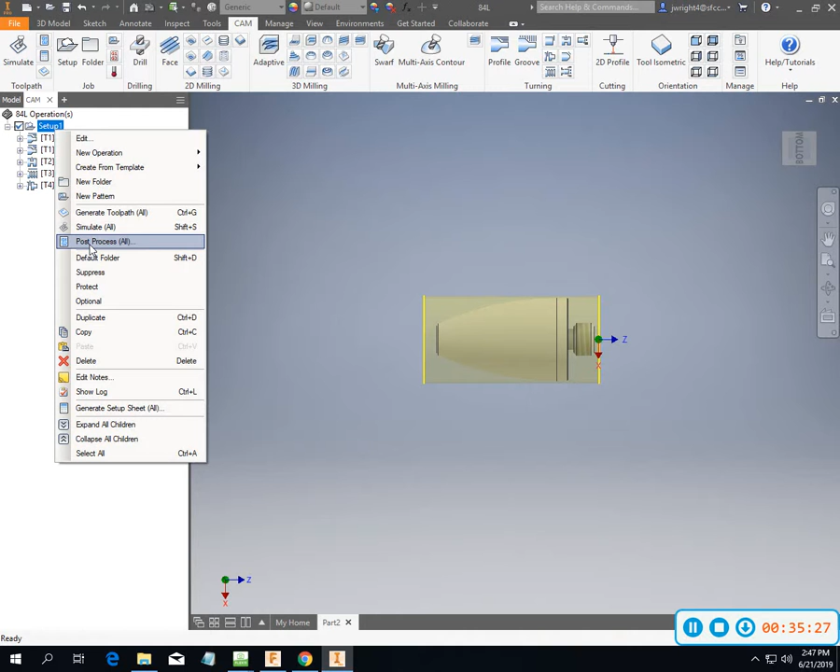So if I can regenerate this, or generate this - alright, pretty happy with that now. So I just do File and then Save As. For this one I'll just go ahead and save it on the desktop. Okay, and then back to Setup 1, post process.

Now we need to go to Haas turning, and name this whatever you want. 8400 is what I'm going to call it today.

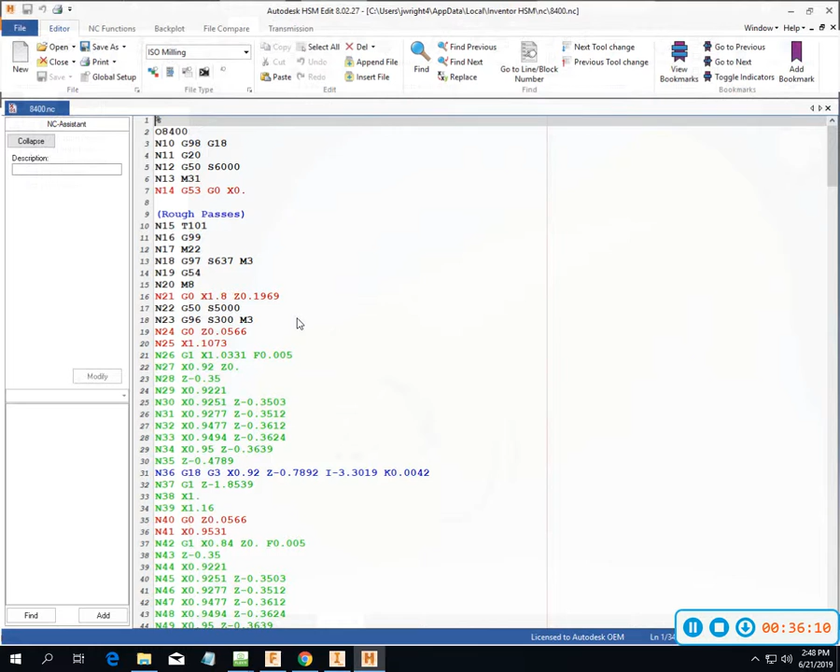So the only things that I'm unhappy about with this, I've got a G96. I'm not super happy. I've got a G50 of 5000, which is super fast - that's my max spindle speed.

So just looking at the way that this starts out, tool change is cool. I don't want chip conveyor and all that stuff turning on, so some of these things I need to come in and edit in the post. G54, turn coolant on, wrap it over to here, max spindle speed, turn the spindle on. Normally if I was handwriting that program, I would turn the spindle on before I even moved.

And so I've got line numbers everywhere, and I don't really want some of those things, so I'm going to make some quick changes. Go back to here and go to post processor and open configuration. So sequence number is false. When they do appear, they're going to be by 100s, starting with 100 and going by 100.

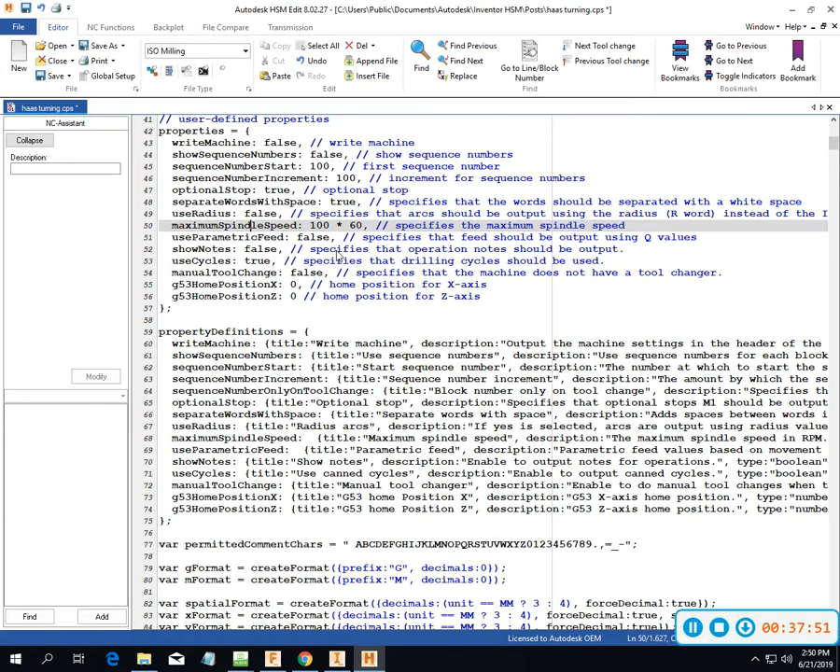Let's see, optional stop on. So there's my max spindle speed, and that's 100 times 60, and I need to lower that down. Actually, probably a better place to do that.

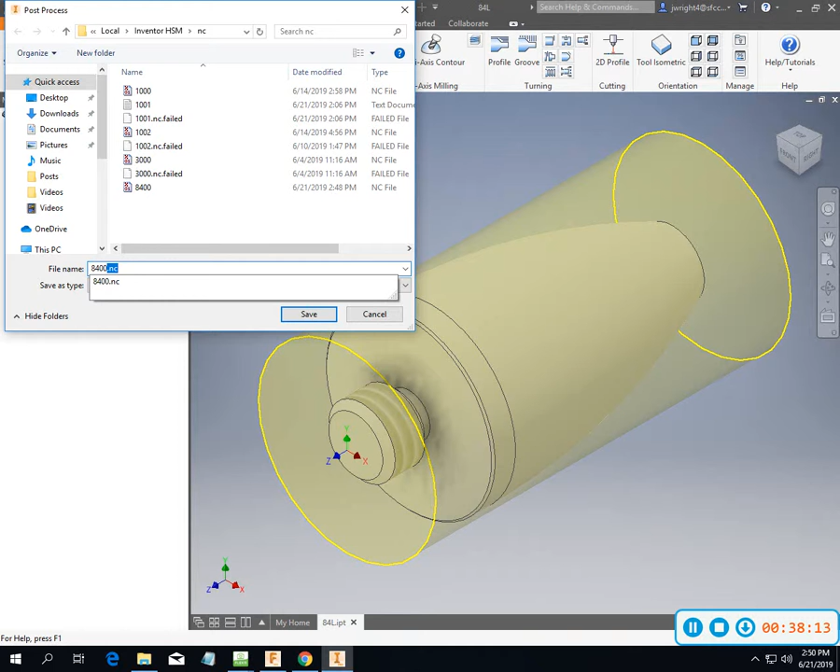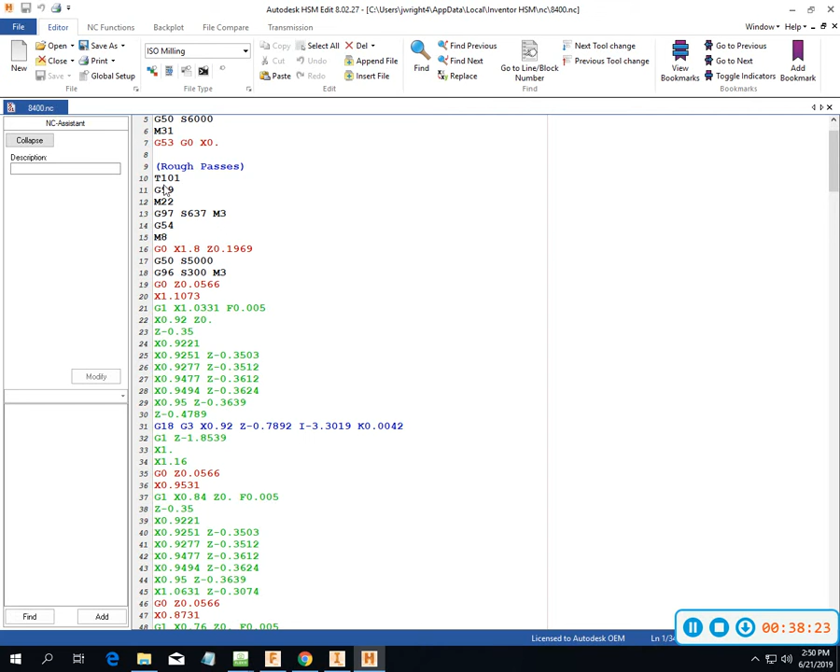Let's do this, let's go ahead and save it, and we'll go back and look at something else. Let's see what changed in there. We were 8400. So I took out all my line numbers - missed that one.

Let's do this, we'll go back to post process, we'll open up the configuration, and we'll do sequence number only on tool change. Sequence number is false, sequence number starts. Let's go back up to the top - I want to do a find.

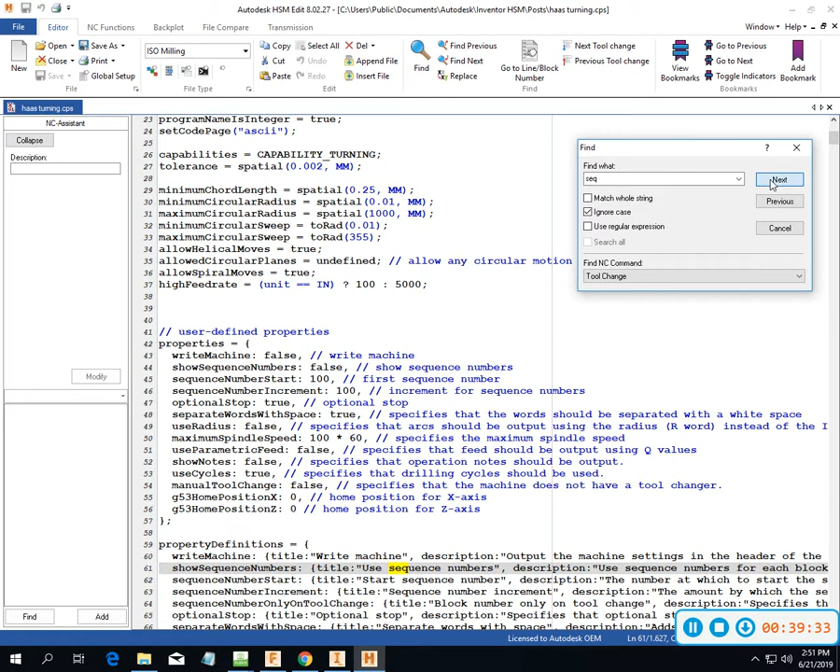Not seeing it on this one. Optional stops, sequence increments, sequence number starts. It's possible that it needs a sequence number, especially if it's going to run any type of G71 or any of those operations. So let's go ahead and let it output as true, and we'll just have to know that we're not in love with that, or at least I'm not.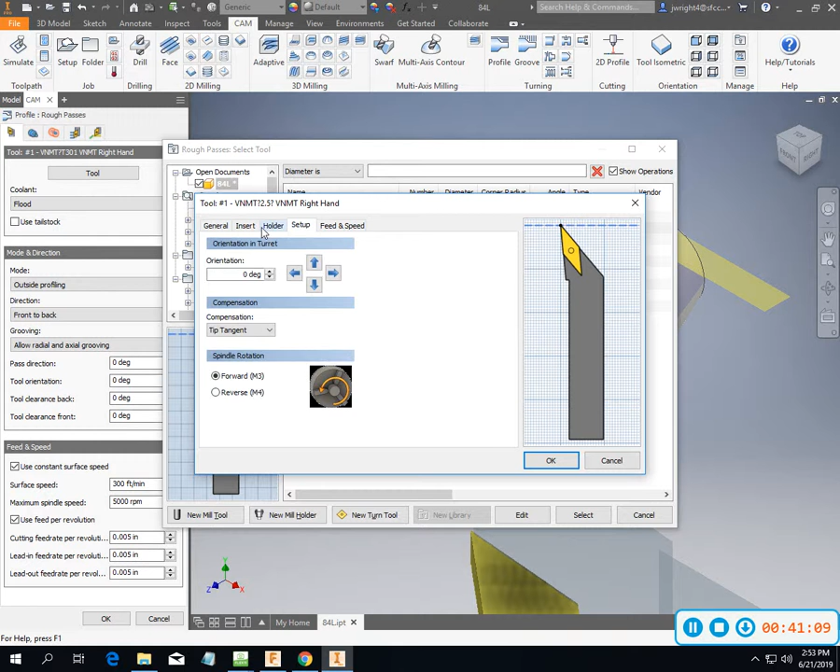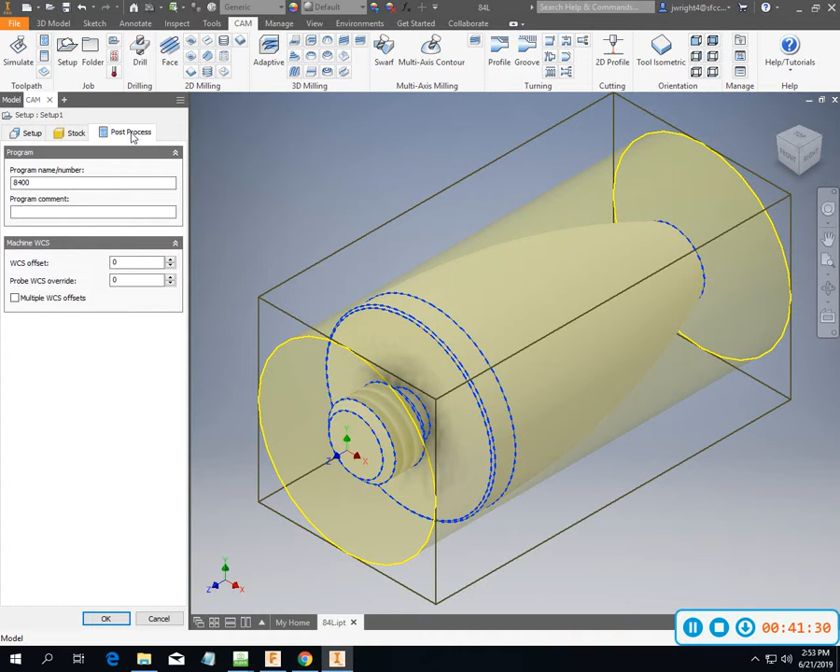Let's go speeds and feeds, see if I have a way to just max my spindle speed here. I was thinking that we did - maybe not. Okay, let's go into the setup and see if we've got an option to do it there. No, nothing there. Okay, so we go back.

Open configuration. Let's see what this looks like. So that's G50.

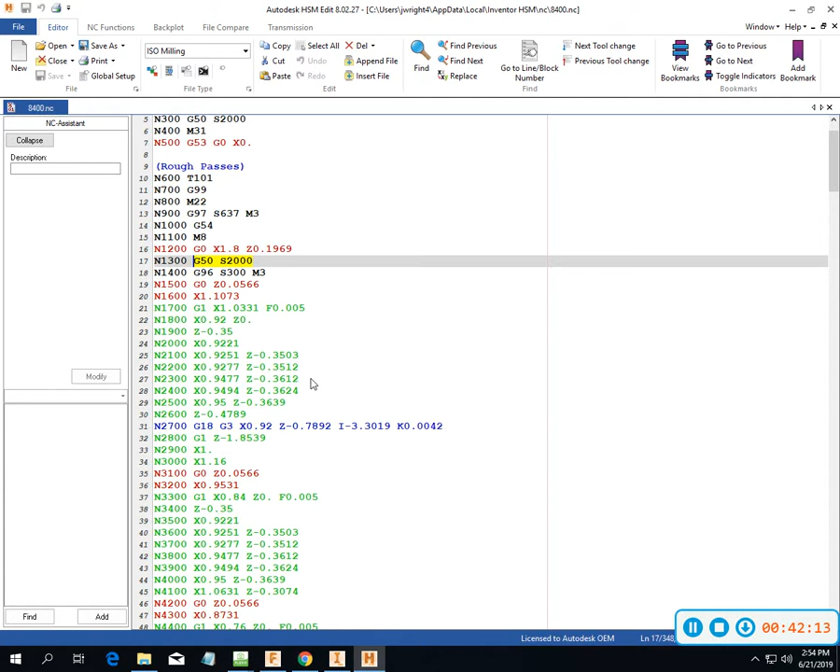Now we're maxing our spindle speed at 2000. I feel a lot better about that. Let's see.

Probably less happy with my tool number, or my numbering, because it's insanely high. So for just me personally, I would go in and play a lot with the configuration. I'll play for just a couple minutes with that.

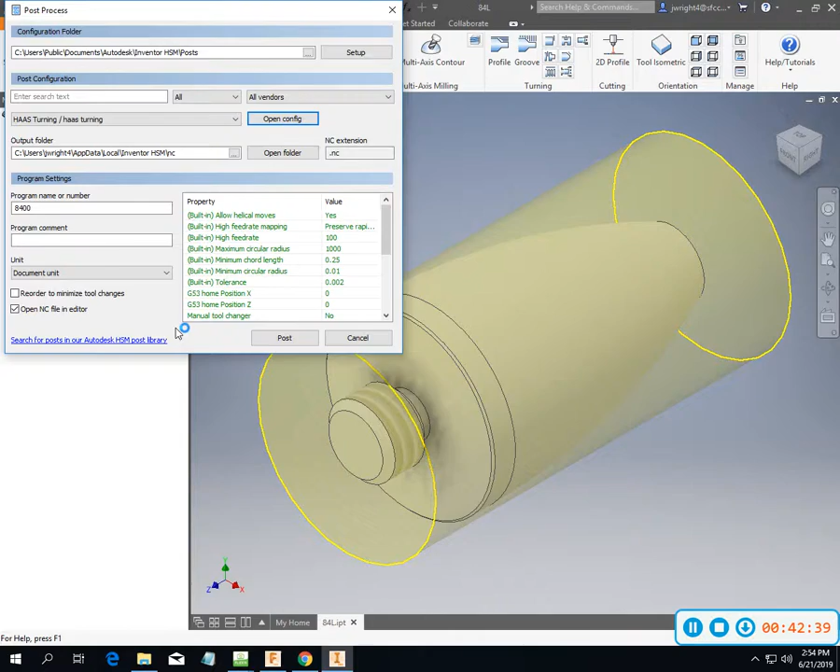Let's start at 10 and go by increments of 5. Probably what it was originally. Let's see if we've got chip transport maybe.

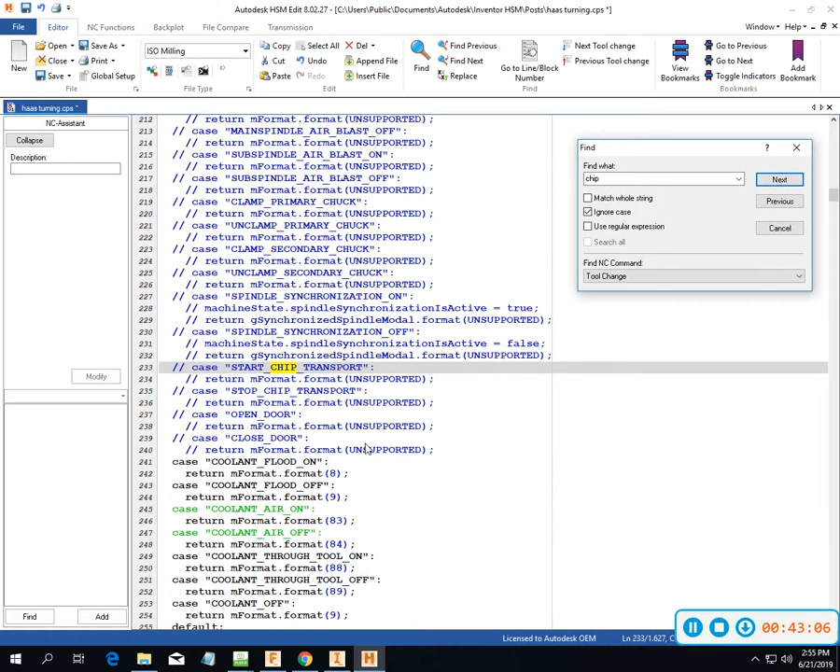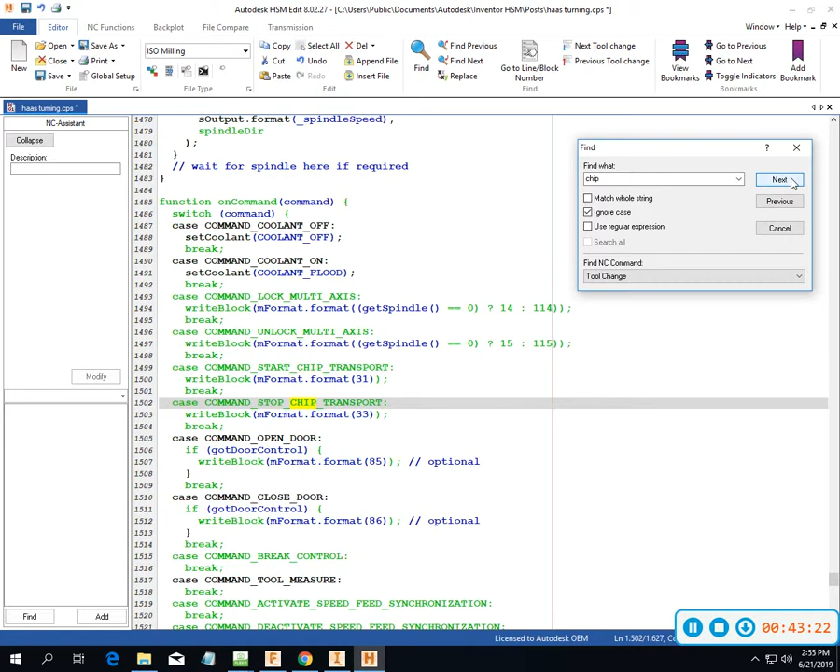Let's see, M31. It didn't shut off any of those things. Now, I won't keep messing around with that stuff right now, but we will want to do some changes on that stuff later on.

Taking out, when I have you guys mess around with the post a little bit more, have you work on that, and work on that. The rest of the stuff I feel pretty good about.

I like the fact that now, different from the mill, this has a tendency to turn coolant off up here and then turn it on down here, and that's something that can be changed as we go too.

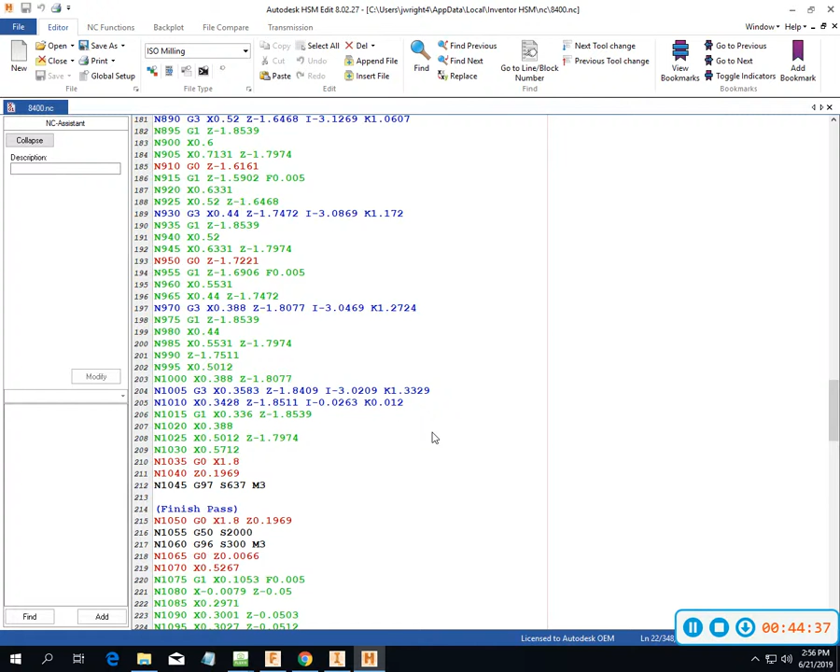One thing I wanted to look at is the threads. So in this one, what I don't like about the threads is that it isn't really outputting a cycle for threads. It'll work like this. It's just not really what I would want to do.

So pitch is probably right. Let's see. 1 divided by 16. Actually, pitch looks a little bit off. So it was 3/8 16. Oh, that's for feed rate. Okay.

Parting comes out pretty long. That would have been better done by a cycle. So I don't know, this is where I'm probably less in love with this particular setup. I think I like milling on this just a little bit better. So I want to be able to come in and use a cycle on threading if I can.

And then, okay, there's cycle, use cycle. And so let's just generate that again. And let's just see if that'll give us an option in this guy too.

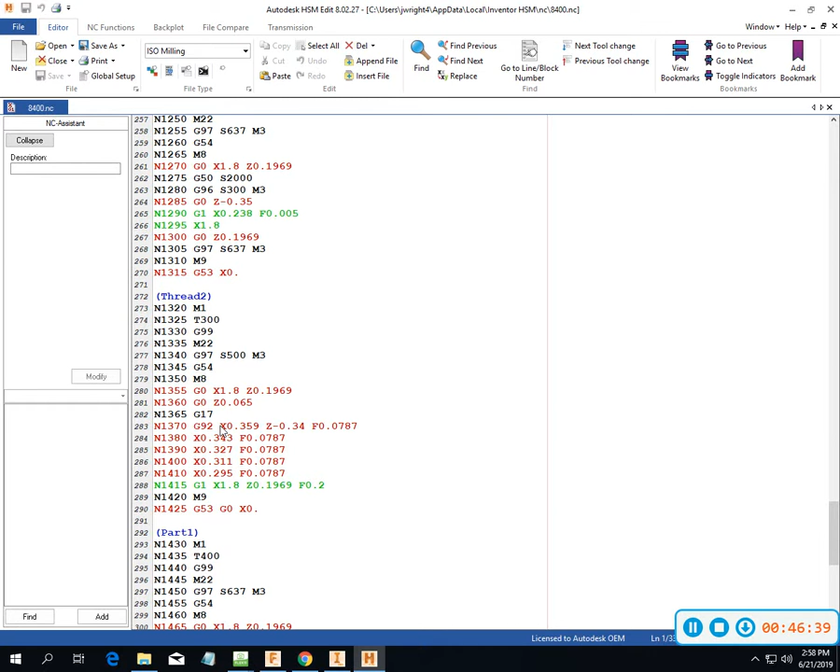So here's a G92. A G92 is a single pass for threading, which is okay. It's not what I would probably choose, but it does give you the ability to do some different things with threading. And so it's not a terrible one to use. It's just probably not the one that I would generally pick. So it'll be okay for the thing that we're using.

What I'm having a little bit of problem looking at is that we have a 3/8 16 thread, I believe. Yeah, 3/8 16, but our pitch is wrong. So our pitch is sitting at 0.0787. So I'll go back in here. I want to look at our thread.

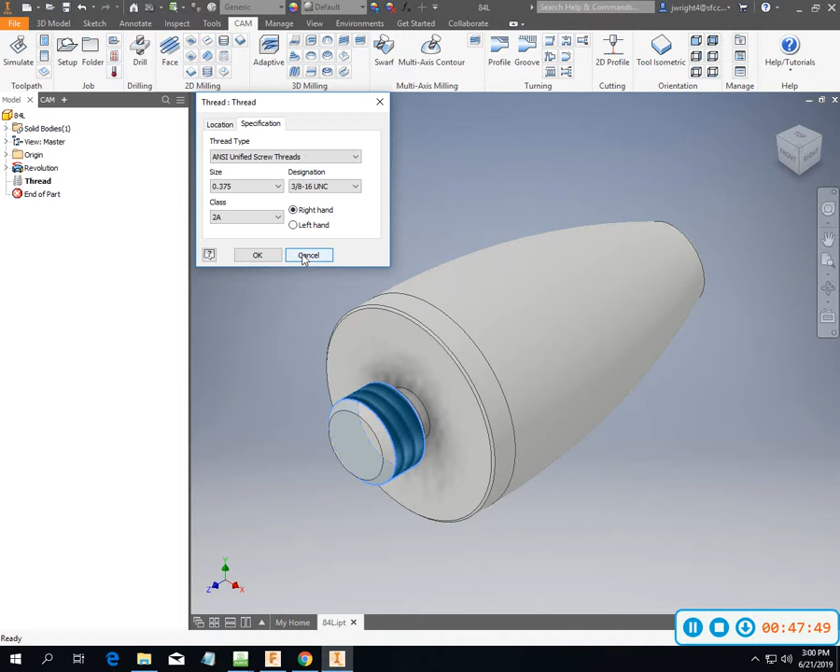We're 3/8 16 2A. Okay, so that's not right. And so I calculate my pitch by 1 divided by 16. It should be 1/16 of an inch. So I'm going to go in and just manually change that. Unless I'm not seeing something right, that may very well be possible.

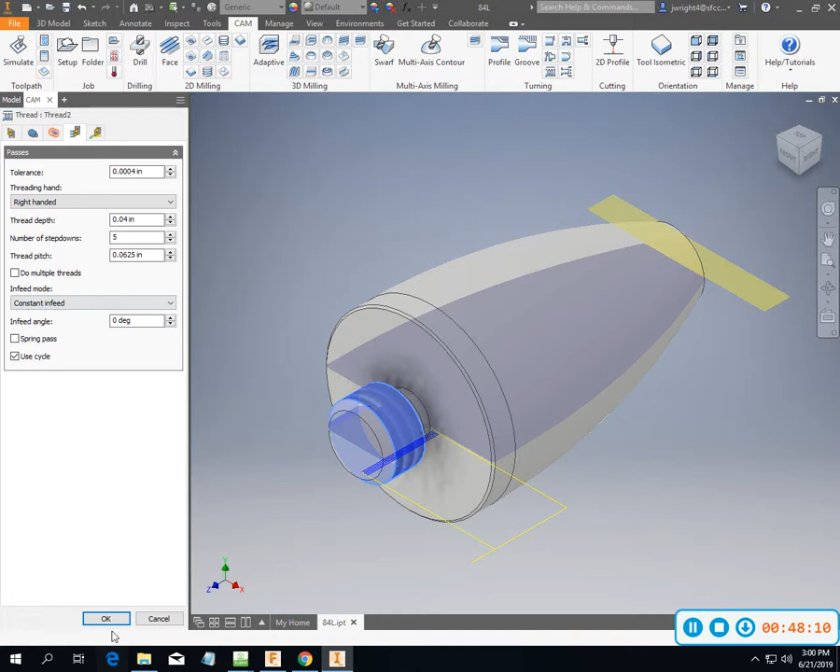That is what I think our pitch should be. No spring pass, that's just a finish pass across there. Now I will do a final generate and then simulate it. Oh, sorry, didn't mean to simulate it, and do a post process on it.

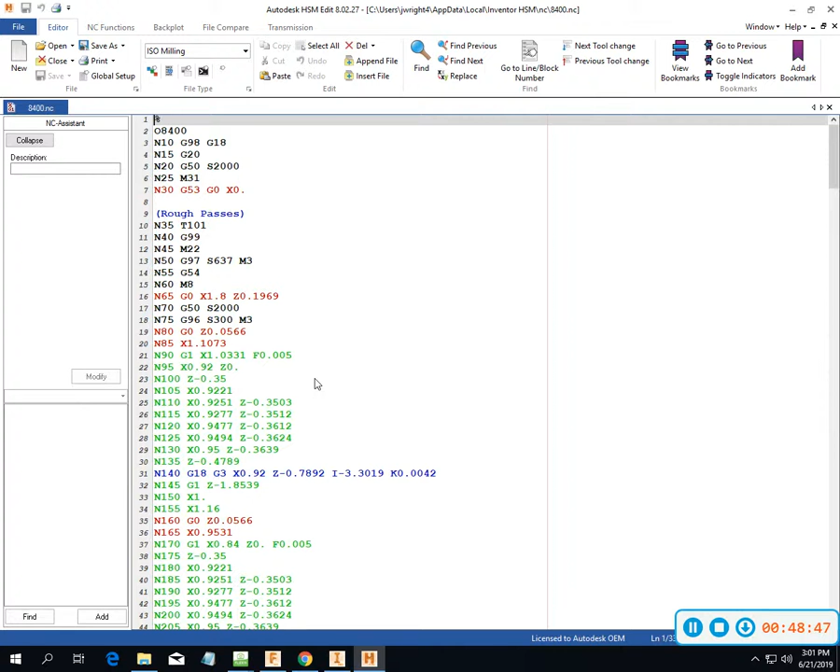For feed rate now, that looks right. Okay, so that at least gets us started in some of our stuff for Inventor.

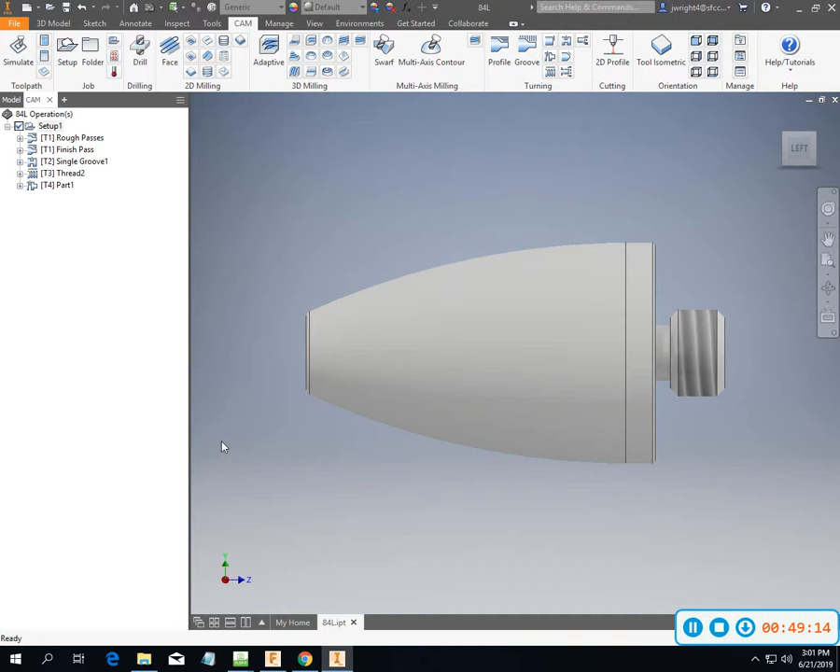Fusion, you can watch the Titan video to get you straight and set up on that. I've already inputted or downloaded the CAM package, or the tooling package for Fusion, so it's already there in Canvas. And so if you look right there in Canvas, you can see CAM lathe tools, and you can go ahead and import that one. That one's pretty straightforward to download.

And if I hadn't showed you that before, you can go into your manager, go to local. At local, you can import tool library and then take it from wherever you have downloaded it from. This was originally the Rocket one. I modified it, made it the CAM lathe tools. Load that in, be able to work from there. So, okay, that's it. See ya.